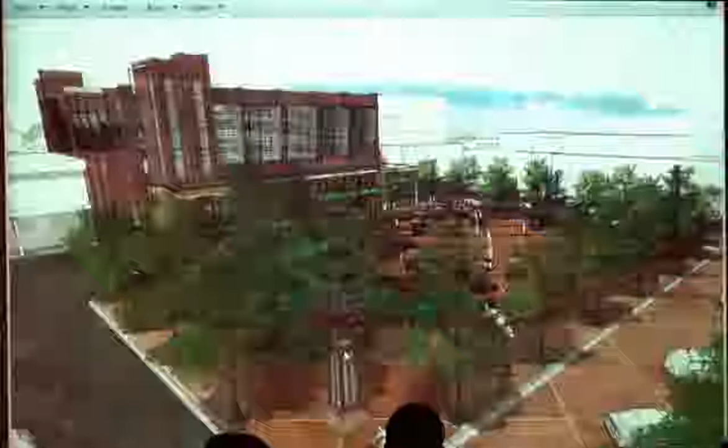This is all in SketchUp, and then there's this one worth writing down - FotoSketcher, with an F, not a PH. So you've probably seen that SketchUp has some ability to do kind of sketchy line styles. If you export that and then give it this watercolor wash, it does twice as good with landscape architecture stuff. If your project is about trees and shrubs and grading, this is what you want to do.

One of the hardest things in 3D graphics is to do soft things like vegetation. Don't try, fake it. We've gotten so much mileage for all of our landscape architecture projects out of doing really kind of soft graphics like this, where there's a mass of green stuff at the end of the day that's a little indistinguishable, for these kind of vignette, bird's eye graphics, to try to describe the sense of the place.

I've sort of gone off here on a tangent. How many of you guys have used SketchUp? Kind of a beginning - most of them we did in a previous class, and then we had kind of a beginning refresher for people, to try to get everybody on the same page on Monday. So, how many of you know the difference between a group and a component? Okay, that's good, that's what I expected.

Let's see if there's anything else here super relevant. Urban designy. Here are some kind of different build-out scenarios in Tennessee. Here's kind of trying to create a downtown core. Really, really simple graphics go a long way.

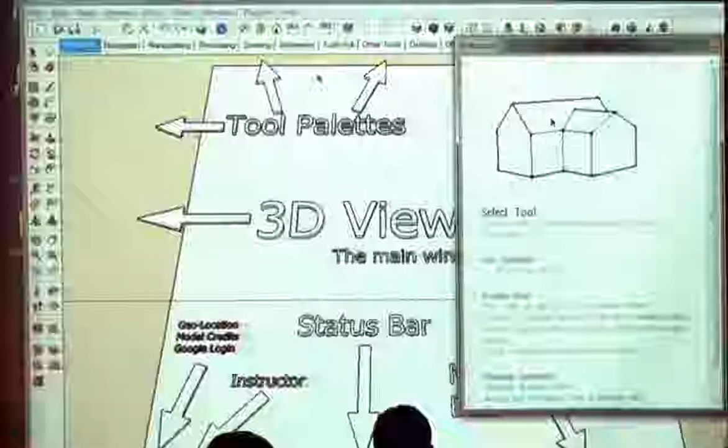This stuff on the left is just irrelevant. The instructor one, the little question mark, is kind of useful - you might find it helpful. It pulls up this tool palette off to the side with even more information and some cute graphics. That's a little on-demand thing and it changes - so here's a select tool, here's the pencil tool, line tool, and it keeps that same kind of stuff, tidbits of information, modifier keys, that kind of stuff. That's a quick access to it.

Those last 3 buttons are totally worthless - ignore them. And you can't see this - oh yeah, and my cute little face there on the right, I forgot about that one. I thought I'd class it up for you guys a little bit today.

We're going to start to go through the menu bars at the top. We'll go through these as needed, but they're pretty well organized. File is pretty basic stuff, printing and saving. Edit - cut, copy, paste, some hiding stuff. Views - generally your graphic style, camera stuff, drawing, editing.

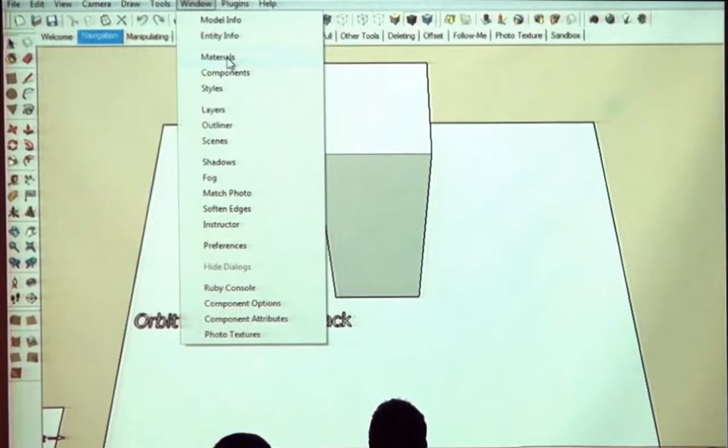And Windows - we'll go through this a lot, but Windows is where - right there, where is it - Instructor lives in here. All of these little tiny tool palettes, like your materials, all of these things live there. So if a window looks sort of like this and you lost it somewhere, underneath Window is where they all live. And then Plugins and Help.

I know it's slightly different on Mac and PC, and I took some notes because they're actually really similar. The biggest difference is when I say Alt, Macs think Command, and Control equals Option. It's really consistent, but I don't have a Mac, so I'm not going to remember that stuff.

Whenever you hold down a modifier key like Control or Alt, your cursor always changes to reflect it. I couldn't even tell you what the modifier keys do, mostly because it's ingrained in my brain, but also because I just watch the cursor.

I just hold down a couple different ones until I get the right cursor. Like if you're trying to select more stuff, you hold down the Shift key and your select cursor gets a little plus minus next to it. So it's really intuitive - don't write it down. Just remember that some of those modifier keys change your cursor icon, and it will tell you exactly what you need to know.

Okay, I've changed this a little bit for today. Navigating is such an important deal. It's so difficult to draw in 3D space on a 2D screen. So I'm forcing everyone to actually navigate through a 3D scene through most of this, just to get comfortable navigating, because it's hands down the most important part - more important than being able to draw well, in fact. Being able to move your view, move your camera to the right location so that you can accomplish what you want is half the game.

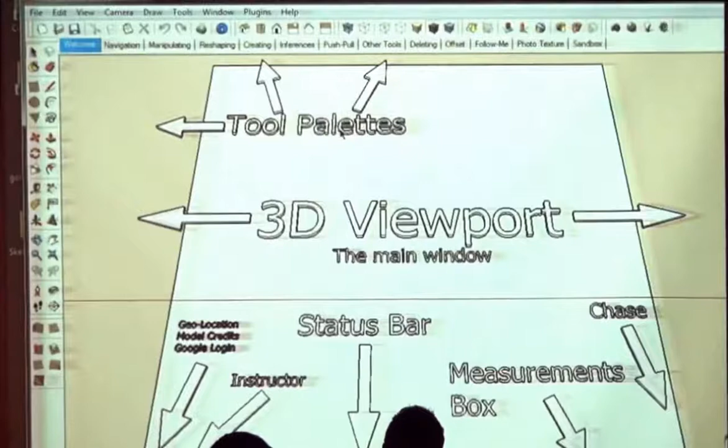So did everyone find that? Large tool set, just so that this is the full palette. And I'll turn off this other stuff so that we don't have to - styles. Okay, and that one's gone too, that sandbox.

Okay, so if you click - and these guys, we haven't talked about that either - these are the scene tabs, and I set these up. We'll talk about them more in depth later, but right now these are chapters for this conversation, okay?

So if you guys all get to navigation, here is the magic. And I'm sure there's lots of non-mice in this room because you're on a laptop, I get it - it's going to be difficult.

First, I'll just talk about the tools, and I'll talk about why the mouse is so important. So those view tools live right here - they're this set of blue stuff. So the orbit tool, which I also don't have that. Okay, the orbit tool is O.

There's a lot of default shortcuts, and I'll try to remind you of them. But if you just press the O key, you should get the orbit tool, or you can click right here next to the hand. It lets you orbit - if you click and drag, it'll let you turn around to the back. The hand tool next to it, pan, H, lets you pan, and lastly the zoom, Z - the little magnifying glass. If you click and drag up and down, it zooms you in and out.

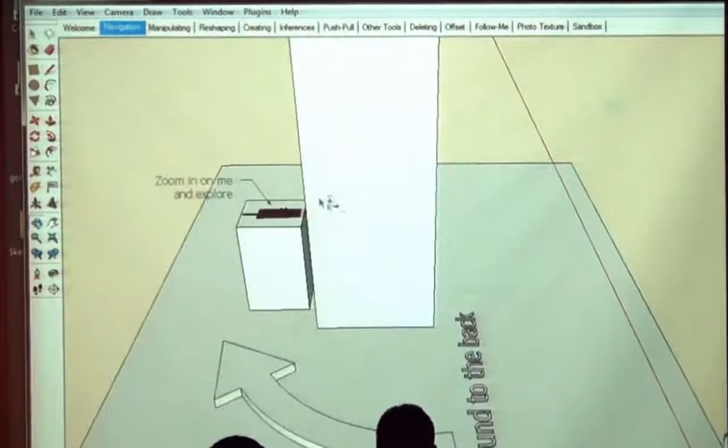For those of you with a mouse, it's all about your middle mouse button. Regardless of what tool you have, your middle mouse button - if you hold down the scroll wheel - turns your cursor into the orbit tool. If you scroll, it zooms you in and out. And if you hold down Shift and the middle mouse button, you get the pan tool. So just with the middle mouse button, you can do all three of those, basically.

So try to get in here and move. Just try to zoom down the street. Try to move through this little urban design-y project.

Am I killing you? Is everyone in the room really comfortable doing this already?

Okay, fair enough. Manipulating. You can just click on the scene tab and we'll get in here. So I have some cars, and these are all groups. We're going to first talk about making things simple and being able to select and move groups.

Select tool, shortcut is the space bar. If you select something like this red car, you can then choose the move tool, which is this guy here, or press M to get it. Just try to move it around a couple spaces.

One of the nice things about groups is if you have a group selected, you can sort of easily rotate them with these little red crosshairs that pop up on its bounding box. Scale tool, stretch it uniformly.

Okay, you guys know this apparently. Moving along, reshaping. As a rule of thumb, something I've learned over time, and I don't know if many other big SketchUp dorks would argue with me, it's generally easier to recreate something than to modify something.

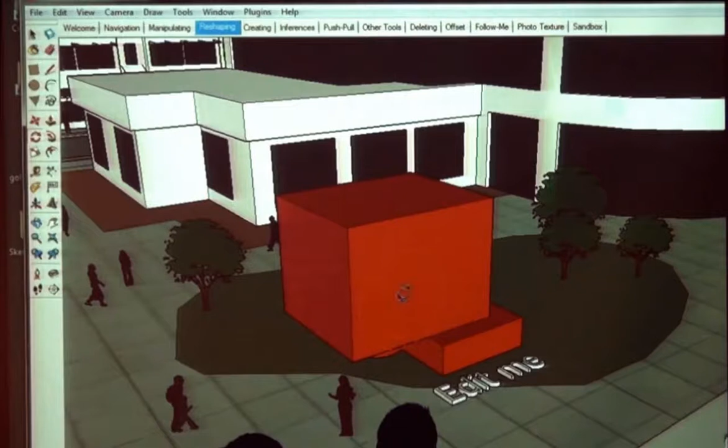So one of the things that's worth noting with this geometry that's loose, not in a group, is if you're trying to modify individual faces, sometimes if you're trying to move something and it won't move — like if I want to move this plane up along blue —

I can't, even if I press up — well, I guess if I force it. But I have to either press the up arrow to lock my axes into the blue one, or do something called auto folding, which is Alt.

If you look at the very bottom of your screen, if you have the Move tool active, there's this Alt toggles auto folding. What SketchUp's trying to do is if I'm trying to move this surface up, it would force a lot of other surfaces to get bent, to get folded, and SketchUp thinks, why would you want to do that? You've already modeled something nice, why are you trying to bend it? That's the trick — you have to either force it into an axis with the arrow keys.

For those of you who don't know, the arrow keys are a way of automatically snapping and locking your motion, your direction, into one of the red, green, or blue axes.

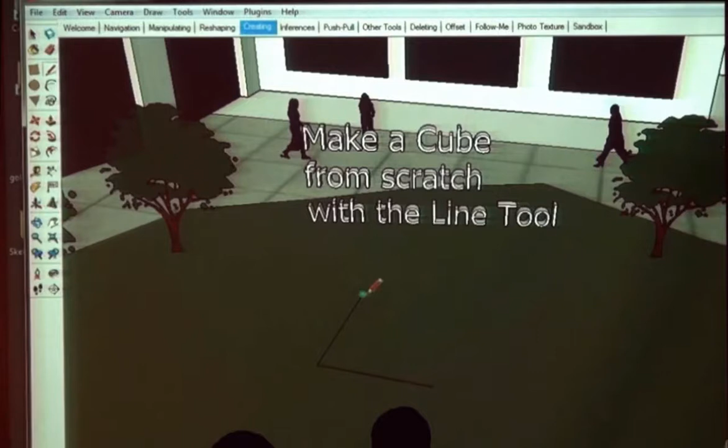So what I'd like you to do is make a cube from scratch. I gave you two edges of it, and I'd like you to go through the process of finishing the bottom part so you have a flat plane, and then making it 3D, all by hand, not using push-pull. Then go up and make sure you're using those dotted inference lines.

There are a couple methods — okay, excellent question. These are subtleties that relate to you as a user. So just using my mouse and the line tool, if I start making this line and it snaps to red, and I start moving it along red, it will automatically snap and put up that little dotted green line, showing that it's inferring that distance.

The other part though, the shift thing, and I use shift — I don't do that, I don't have time to wait for SketchUp to figure out what it's locking to. What I do is, as soon as I get my line to snap to the red axis,

I hold down shift — let me move that up here so you guys can see a bit better in the back. It gets thick. When you hold down shift, that line gets thick, and it constrains it, which is the SketchUp lingo. It constrains it to the red axis, so wherever I move my cursor, it's only going to be making that line along the red axis.

The trick here is that if I move my cursor over the next endpoint that I want to align with, I can force my current red line to be that same length without thinking or waiting for SketchUp to do the little dotted things. So then I click on this endpoint and just close it in.

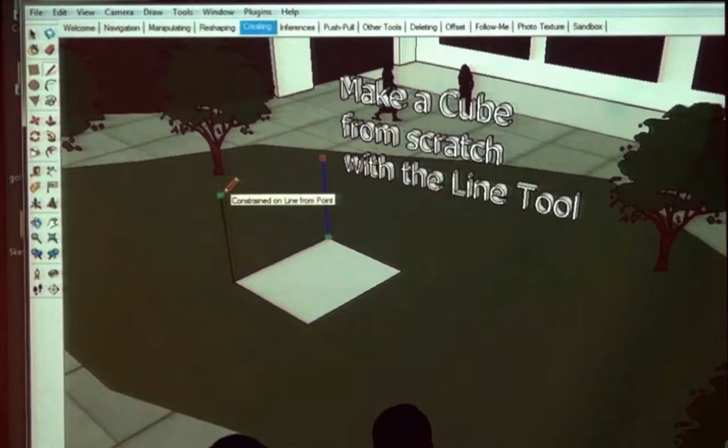So I start making a blue line, hold down shift, and hover over this first vertical leg I made. Then click, let go of shift, and close it in. Click, find blue, hold down shift, hover over the point I want to align with, click, let go of shift.

That's the way I would recommend it, but you don't actually have to use the shift key. SketchUp has gotten a lot better in 8 about guessing without using shift. So anyway, get yourselves a box made.

The inference thing is so huge. Please raise your hand if this is not crystal clear. Okay, moving along.

I'm just not getting it lined up exactly. I should use this shift tool. I think the shift thing really helps.

The biggest blight of SketchUp is when things are close and not quite right, because those subtle shifts are hard for us to see, but they make the model not work at all.

So if you're having issues, like other people are, why don't you guys seriously make 10 cubes there in this time until I get back up here.

There is no way I'm going to get in here, is there? Oh my gosh, I'm off a whole row here. Okay, maybe this isn't going to work.

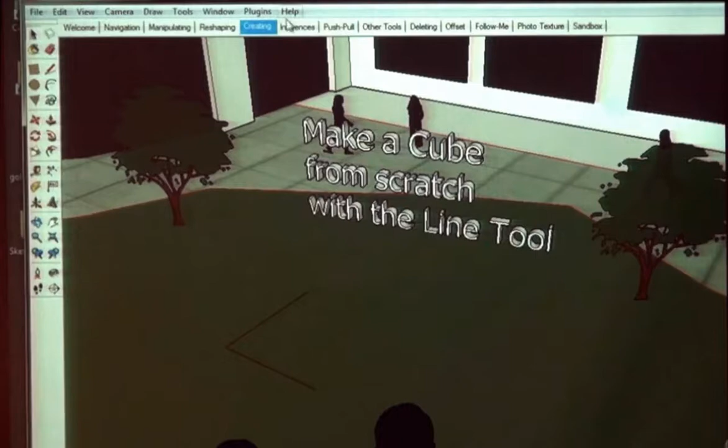So let's move on to inference. Here are some random shapes with holes cut out of them that I'd like you to finish using the inference stuff. So obviously for this cube...

L—we need to make a red line that extends this high and then close it in. For the triangle, here's someone just asked about parallel. There are a couple for the triangle; for the rectangle it's easy because we're on red and green. For the triangle, though, we have to find some magic point here in the middle where these two lines intersect.

And here's how you go about it. Magenta is the color that represents both parallel and perpendicular. They figure they're 90 degrees apart. You should be able to tell which one's which.

If you click on this endpoint, what I like to do is backtrack a little bit and hover over this line segment, and it usually says 'on edge.' At this point, you can try to extend out a line, and it should be magenta. Then hold down Shift and hover over not the endpoint, but the line segment itself. If you hover over the endpoint, it'll try to make a right angle to that endpoint. Rather, you want to hover over this line and say I want this line to intersect this other line. So then I hover over this guy, click, let go of Shift, and click again. Well, it doesn't actually... oh there it is, I did get closed in, it's just the other side showing.

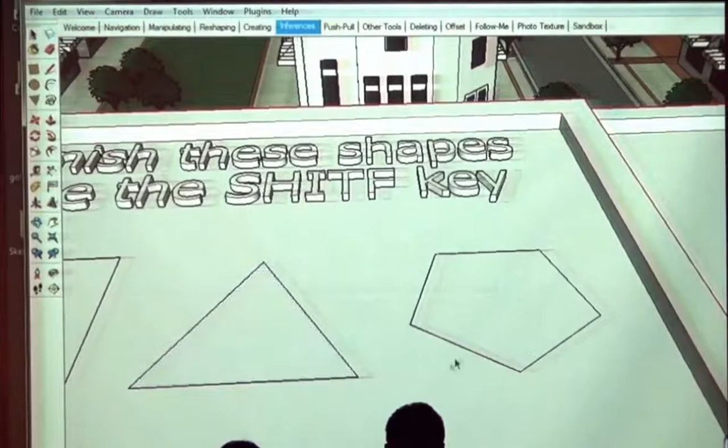Same with this guy: endpoint, backtrack, magenta, hold down Shift, hover over the line segment. And then try these 3D shapes.

Who had the question? Yeah, sorry. I'm gonna click, go back, hold Shift down, and it's just blue. That's just because of your view - you happen to be at a view where the vertical line is right in line with what you want, so orbit over a little bit. Sometimes it just doesn't snap. Oh I see how that's going. There it is, perfect, no that was right. Then click, let go of Shift, and finish. Okay, got it.

So making things groups would help with managing the file size? Not the file size - in fact making groups probably adds a little bit. Making things components saves a little bit, because if you have one tree or one tree type, you can make it a component. What it does is remember all the geometry in one place and then all the locations of that geometry. But groups are not important for file size - groups are important for organization and not going insane, because otherwise it's all separate little lines. So components help a little bit with that.

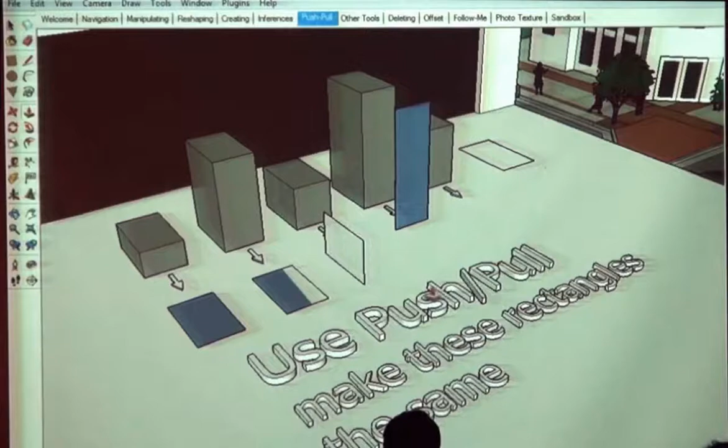What I wanted you to do is practice the same kind of thing using inference, except you don't actually have to hold down Shift for this, which is nice, to make the same shaped cube using those starting points. So this guy, if you click and then move your cursor over any of these endpoints or these lines, it will extrude it to the same height. It's just getting you comfortable using other geometry to influence the height and distance of the stuff you're building right now.

So then from the left to right, front to back, I actually have no idea why I drew that because you can't really do anything. I guess you could use this one. That would work. Going down.

That was supposed to be pretty quick, but it's different, because there aren't any axes, pushing and pulling is a one-dimensional thing. You can only go one direction, perpendicular to that surface.

All right, other tools. Is that all good? Questions? Oh, one of the things, let me go back.

Sorry, I lied. The one other thing I wanted to make you aware of, if you didn't know, is push-pull has modifier keys, the control key. Once again, who cares what control is? Shift, Alt, Control, one of these is going to do something. If I hold down... oops, P.

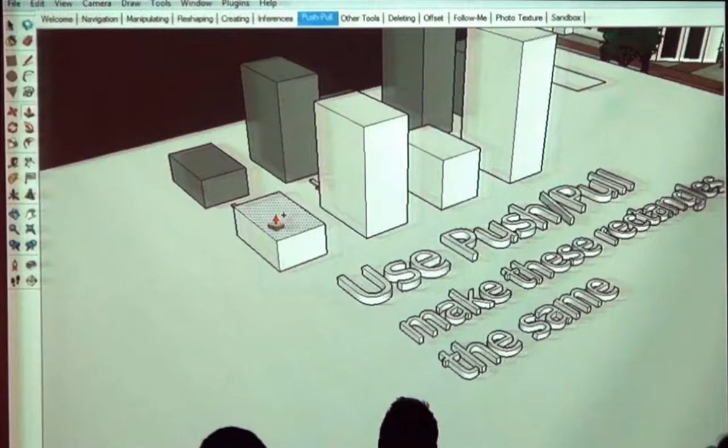I just freaked it out. The control key will toggle a little plus sign next to my cursor, and it will say at the bottom: Control, toggle, create new surface. So what the little plus key with push-pull does is it leaves a division in there for you. It creates a new face rather than just moving that existing face. This is useful for saving you from having to draw new lines generally.

Did that make sense? Oh, navigating, manipulating.

Okay, other tools. Frankly, these are just time savers. The arc is useful, I guess, because it's pretty hard to draw an arc segment by segment. But these make some other shapes. It's just these other guys here.

Rectangle goes corner to corner. Circles are circles, they go center out. Sorry, there's no, for you CAD junkies, there's no 3-point circles or anything.

Polygons, you can choose the sides. So the one thing you can do with this is, as soon as you choose the tool, you can type in a number and hit enter, and it'll change the number of sides of this polygon. So right now it's on 6. I could type in a 3 and hit enter and make a triangle.

Arc tool: endpoint, endpoint, and the amount of deflection. And freehand lets you draw freehand stuff. It's pretty tough to do anything really useful with the freehand tool other than trace contours.

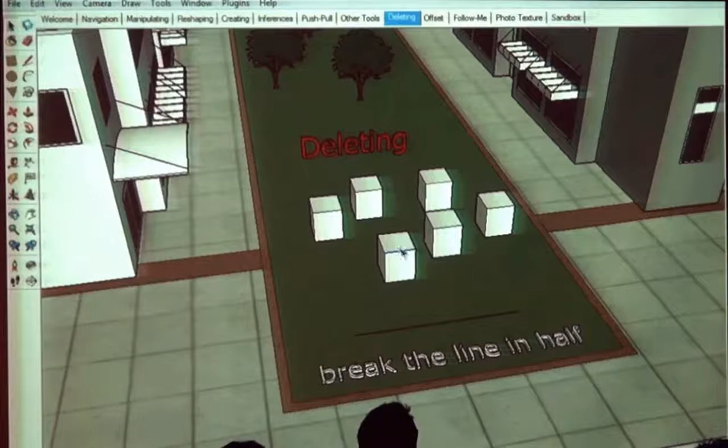So if you single click on something, you get that face, either that face or that edge. If you double click, you'll get that... oops, too close in. Double click, I'll get that face and all of its edges. Or if I double click on an edge, I'll get that edge and the faces it's separating. If I triple click, I can get all of the faces that are connected or touching at all.

Dragging bounding boxes with the select tool left to right needs to fully enclose the object. If I only drag the box over half this cube, I'll only get that one edge. Versus going right to left, it just needs to be touching. So if I do the same thing, I'll get most of that cube, all of these faces and edges, just shy of this stuff on this one edge.

You guys all know this?

Once again, modifier keys: Control puts up a plus. The Shift key puts up a plus-minus, so it toggles whatever you touch. If it's selected, it gets unselected, and vice versa. And it looks like the magic combination is Shift-Control, which gives you the minus, so you can deselect things.

And if you forget those things and are panicked, you have no idea, they're not at the bottom of the status bar here, but I guarantee they're in that instructor window.

Good point, sorry, let's go back to deleting. So one of the things that's frustrating is there's not a way to break a line in half. There's not a break tool. The only way to make a line segment shorter is to connect a line maybe to the middle, so you can snap to the midpoint, cyan, connect a line segment, and then choose the eraser and erase the segments you don't want. There's no break tool - that's just how you have to do it, and that's not necessarily intuitive.

Okay, so offset - F is the offset tool. Is everyone familiar with offset? I heard one no, so there's probably a couple more. Offset works in a similar way as push-pull in that it kind of auto-selects whatever you hover over. So if I choose F and hover over this plane, it'll hatch it. What it does is put a little dot on the nearest edge to your cursor - that's going to be its reference point, indicating we're going to measure an offset distance from that point to your cursor. So if you click, you can start to drag in from that location or out. In this case, we want to go in.

Like with any of SketchUp's tools, do you guys know how to do specific distances for stuff yet? You just type a distance and hit enter midway through any operation, basically. So in this case, we're going to offset this in, let's say 2 feet - 2 apostrophe enter. I think feet are the default unit.

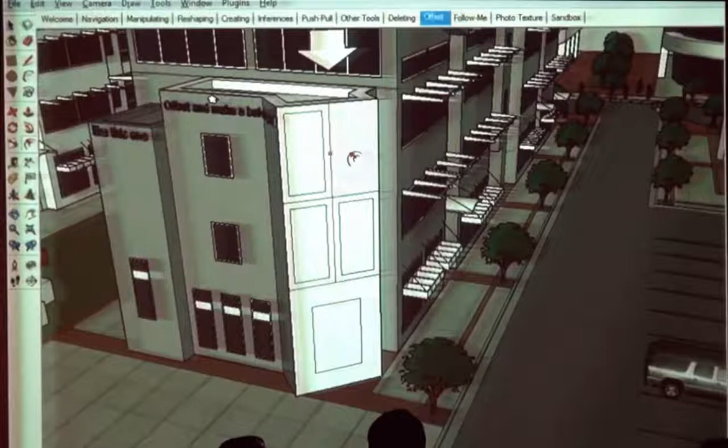One of the nice things with both push-pull and offset is if you double-click on a surface, it will repeat the last amount that you just did, which is a huge time saver. If you're making a whole bunch of building footprints that you're popping up to 15 feet, just as irrelevant context buildings, do one at 15 feet and then double-click on the rest, and they will pop up to that same height. Same thing with offset.

How long is class, by the way? Typically till 9, but... till 9? Yeah, but I'd say, I'm thinking half past 9, 9:30. Oh okay, that's what I thought. Maybe like another half an hour? No, I was expecting till 11. Anyway, we'll just keep going.

Okay, offset and double-clicking all makes sense. Okay, so let's do the next one.

Follow me. So follow me is really sexy - what it does is let you sort of extrude, like use push-pull along a path. And there are two methods. So this is the follow me button - double click, or excuse me, this guy right there, right below push-pull.

So there are 2 ways. You can either select the Follow Me tool, click on what I'd call your profile surface - the one you're going to be pushing and pulling around - and then drag it along a path. So you can do really sexy, complicated things like a planter without a lot of effort.

This is important because it's literally impossible to join these arced parts at these 3D angles. It's a huge thing.

Okay, so the click and drag method works, and you just kind of have to be patient with it. But this is not the recommended method to do it, because you end up fighting at the end, and then all of a sudden you are doing weird things - like, what's this? How did I even get that? And you're never going to fix that.

So here's how you should do it. It's a 2-step thing. You select the path, then choose the Follow Me tool, and then click on your profile. So if you double click on this bottom part, on the base, on the path, and then deselect the surface, then you just have the edges. Then click on the Follow Me tool, and then click on the surface profile. It just does it for you.

When you did the windows, did you do it that way where you double-clicked to get the face and then deselected the face to get all 4 corners, or did you select each one? I did them individually. So what I did is I offset this one and then double-clicked, and it repeated that same amount.

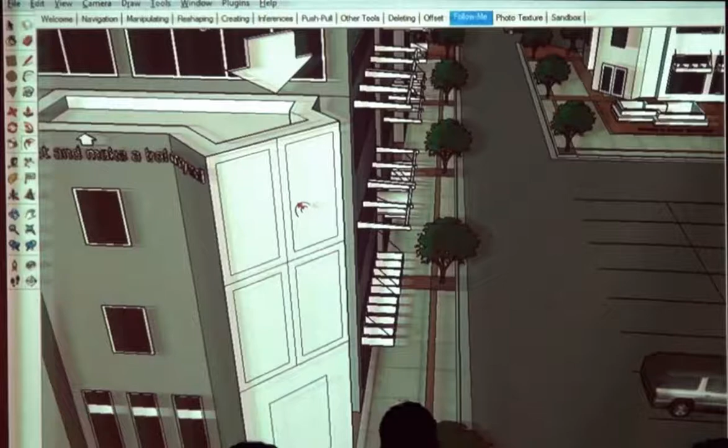Yeah. Okay. Because Follow Me is so sexy, you get it twice.

I have a question. How come sometimes the shapes turn blue and sometimes they turn white? Okay, great question. SketchUp thinks of geometry as being all 2-sided. So a single triangle has a front side and a back side, and they're both visible. This isn't the case in lots of other 3D software. By default the back side is invisible. SketchUp's trying to help you out, knowing that if you export this to something like 3D Studio Max, by default the back faces are invisible. So the default is blue is the back side and white is the front side. If it matters - and it won't since you're living in here generally - you should try to keep the white sides facing out. They should be the visible face. That's what that is.

Okay, so Follow Me again. So the path - you double click to select this whole surface, and then shift click to deselect the surface, so then you just have the outside path. Then choose the Follow Me tool, and then click on the surface of that profile, and it will drag it around for you.

Is there any way to combat that camera cutting off? Yeah, and this didn't happen quite so much at home. This is an effect called frustum clipping, and it happens in geographically large models.

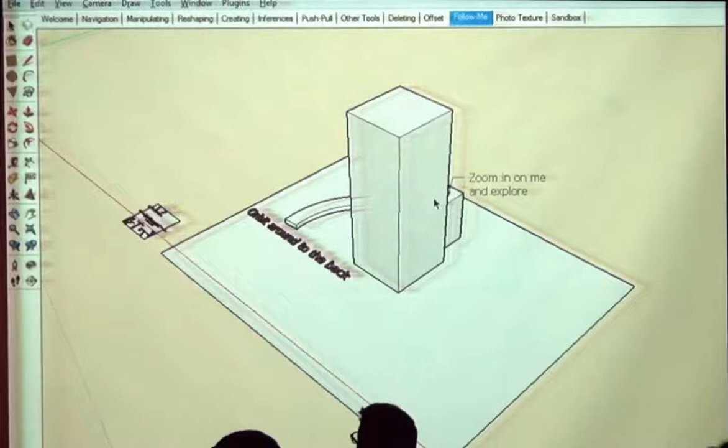Because this little tiny thing has all of this other junk around it, SketchUp kind of needs to be able to think about all of this stuff and keep everything ordered when it renders it front to back. So what it does is it tries to cheat and push the first point you can see farther away from your nose. The only way to solve it is to make your model not so geographically large. It's a proportional relationship to how big your model is and how close you're trying to get into something. It is, in my opinion, one of SketchUp's only real big flaws - there's no way to manually control that.

Sometimes when it's really bad, if you go into a group and hide the rest of the model - where's hide at? Or show, where is it? View. Hide rest of model, and hide similar components. So you're just looking at this one individual group, and then go zoom extents, which is this button here. It'll kind of bring things back and clean up that relationship a little bit. So then when you go back out into the real world, you can sometimes get in a little bit closer, but it's a drawback. It really is.

So when you're doing big landscape projects and you maybe want to have some views of the mountains in the background, don't bring them in from Google Earth, because it will definitely compromise your ability to get on the ground close for the stuff that matters. You're going to have to fake it - put in some kind of wallpaper in the background or something.

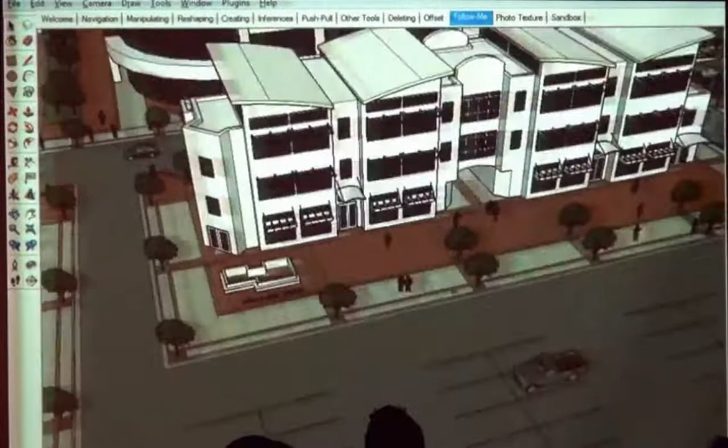I built this for a project, so it's okay, it was a little quick. Groups and components - the difference between groups and components. You've heard both these terms, I assume, or at least heard of them.

A group is just a collection of stuff that's segregated from the rest of the model. A component is identical, except that it shares changes with its twins. So if you make a copy of a group and then go inside one of those groups and edit it, you've only changed that one group. If you do that with a component, you will have changed it and all of the other copies of that component, which is very useful.

But just as many times as it's been useful, I've inadvertently changed other parts of my model that I didn't want to, so you have to be really careful. Let's talk about groups and components just a touch more. Did that all make sense, at least in concept?

Components share changes, components share changes. So let's make - I don't know - let's talk about making a group. So here, let's just go back to our planter.

We'll pull that up. Oh, this effect here, just so you have a word for it, it's called z-fighting. This plane of the bottom of this planter is in the exact same place as this ground plane, and SketchUp just can't decide which one to draw first. So anyway, let's pull that up.

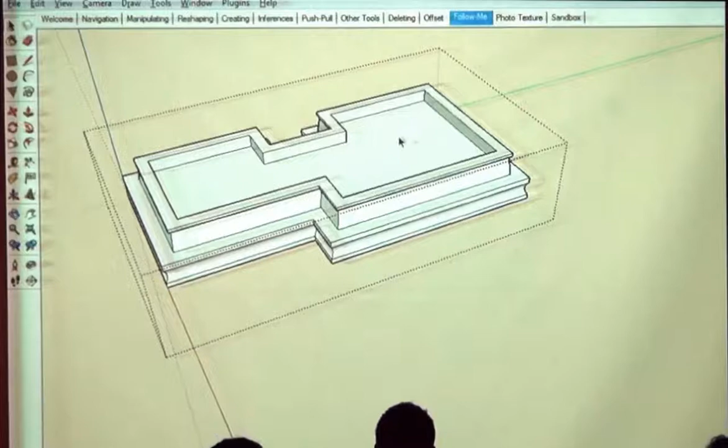To edit groups, let's say you need to put more or less dirt in this planter. You can double click on it, the easiest way by far. Then you get inside, and you can actually manipulate the individual parts of it. Then either hit escape if you're zoomed in really close, or just click outside these dotted bounding lines - the bounding box - and you'll go back out to normal space.

Is that all crystal clear? Groups are easy, and you can have groups within groups within groups, and they keep the hierarchy. It's the way you should model everything - it's the way you should organize your model.

I typically have only one thing ungrouped at a time - the one thing I'm working on at that time. And as soon as I finish it, I group it and then move on to something else. I cannot harp on that enough. Okay, let me undo.

So we get back here to its ungrouped state. Let's pretend now that we know we're going to have a whole bunch of planters, and they're going to be identical to this one. Maybe we don't know exactly what the materials are going to be yet, but we know at least the locations of them.

So we can use this as kind of a placeholder, so we can be thinking about it. On the back end, when we do know what materials this is going to have, we can just do it to one single model, and it'll replicate those changes everywhere. So once again, triple click on it to get it all selected, make sure it's not a group anymore if you undo a couple times, then right click, and right next to it is make component.

This is the defining part that's a little bit different. You get this window to pop up, and we are going to ignore some of this stuff for now. The only thing that's really important is that this bottom box is checked - replace selection with component. You can give it a name, and it's a good idea to name this stuff - it'll help you find things that are lost later on. Planter.

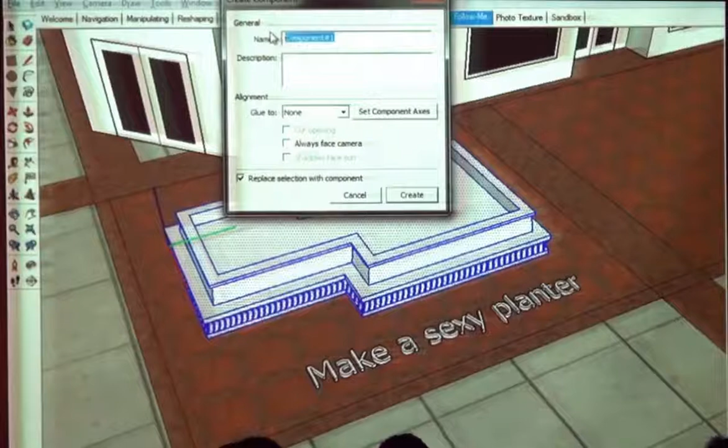And then hit create. Same thing, it's a group, you move it around, it looks and feels and walks like a group. You double click to get into it. But here's where the magic is.

So if I make a copy, does everyone know how to make a copy using the move tool? I heard a no, I heard some yeses and nos. This is an important one. If you do not understand, raise your hands. How about if you do understand, raise your hands. Okay, that's a way better way to ask the question.

Okay, so here's how you do it. You have your group selected. You choose your move tool, M, modifier key. At the bottom you can see it'll say Control equals toggle copy. Who cares what button it is? I'm going to press the modifier keys until I figure out which one it is. You get a little plus next to your move icon. Now you're in not just move mode, you're in copy mode.

And if you use it just like you would, I'm going to slide it over here along the green axis. This is how you make a copy. This is, in fact, the only way you should make copies. You should not use copy and paste. Copying and pasting has its place in SketchUp, but it's not for this, it's not for duplicating.

And if you hold down Shift, it'll slide it along like a red or green axis. It'll lock it in exactly the same way. So you start the copy with Control, then you find your axis, and then hold down Shift.

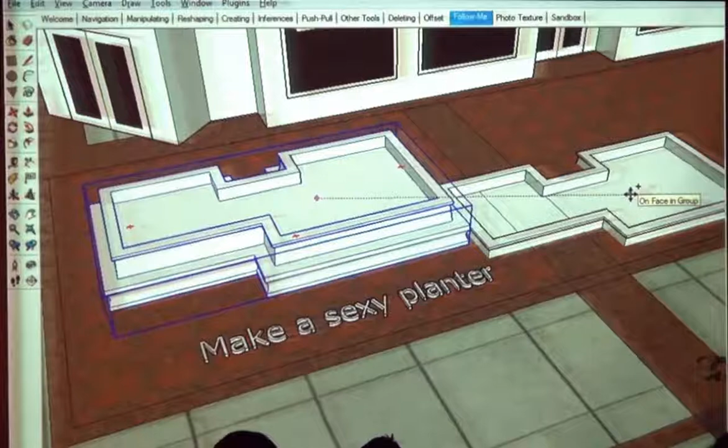Yeah, so let me guess. So you did this, and this is where you got. So you just have to find one of those axes. Or better in this case, if I were to select this, move, copy, and grab one of these, snap to one of these points at the bottom, then I would be dragging around the bottom point, and it would then snap to the ground plane.

So here we have, in fact, let's grab a tree. Here's the copy and paste thing. Copying and pasting is good to move an object from inside a group to outside of a group, or from inside one SketchUp model to another. That's it too. So I'm going to copy this tree, and come out here and paste it. Okay, so I have this tree. You guys could use the planter or whatever, I just grabbed the tree.

So let me talk about this in concept first. Hear my words, watch my motions, and then we'll walk through it, because it's going to take us 3 iterations to get it, just because there's a lot of button pushing at specific times. So I have a tree selected. I grab my move tool, and I make one copy, just like we talked about doing before. Then I do some keystroking. I press the asterisk key, which is Shift 8, and then a number. So asterisk 5, and then hit enter. And what it does is it repeats that same offset, in this case 4 more times. It counts the first one.

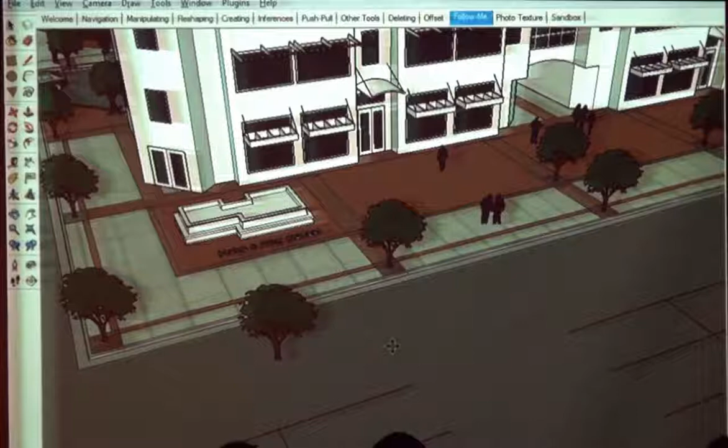Okay, 10 more of you got it. So undo, well, I'll step through this again. Select my tree, choose my move tool, toggle on copy mode, click, move it over, and click again. I've finished copying. Then type in Shift 8 for the asterisk and a number, and then enter.

Don't type 10,000, you'll crash SketchUp. It will, and every time it crashes SketchUp, or brings it to its knees, and you have to wait 10 minutes. Okay, one more time.

Select your first shape, move tool, toggle on copy mode, click, drag, and click so you've finished the copy. Then type in asterisk. You do not need to click in that little measurement bar at the bottom. Numbers you type automatically go there. So asterisk 5, and then press enter.

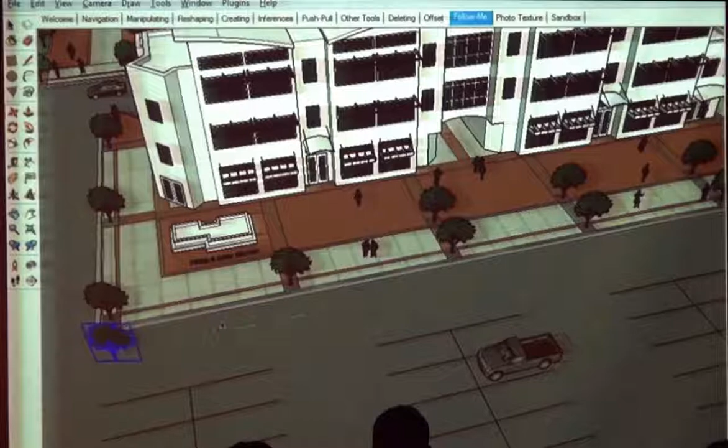So the concept is make a copy, then type in the asterisk and some number. There's a converse of this where you don't know the distance amount but want to evenly space some things. I have no idea what these tree offsets are, for example. If I make a copy to the far location, instead of using the asterisk, I use the divide by, the forward slash, I think it's 4. I will evenly space 4 in that distance, which is equally useful.

But it's the exact same method. Questions?

Now how many of you can make an array? All right, so we needed about 2 more iterations.

How about this? Do you think how that might be useful for our landscape? I know there's a plugin somewhere, but what you can do is make an array in one direction. If you're making a little garden, make an array in one direction and then select those 10 elements and make an array in the other direction to get a grid.

That's useful. You can do the same thing with the rotate tool. You use copy with the rotate tool to fan one over and then multiply. So if you have a column of 10 of them and select all of those, you can fan out those the same way.

You cannot, however, copy along some curvilinear path. If you want to put little garden lights along a little path, you have to do that by hand. There's probably a plugin to do it somewhere.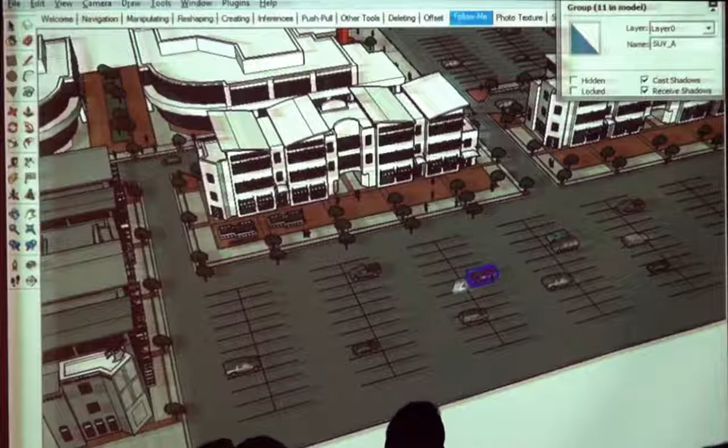The one way that I know to find out easily is if you right-click on something, anything, even on the background, you get what's called the contextual menu. The very top thing is called entity info. If you select something, it'll tell you info about that entity. So this building is a group. This planter I just made is a group. It'll tell you how many there are and its name. These trees, it turns out, are components also. These cars, on the other hand, are actually groups, and it says that.

So that's the quickest thing. And this, once again, if your right click doesn't work because you're crazy, underneath the window menu, same thing, entity info.

A lot of components also denote resources that come from the shared component libraries built into SketchUp or the 3D Warehouse. The word's used a little bit interchangeably for both groups that share changes and a library of parts. If you hear component library, it's the same thing. But generally speaking, things that come from the component library or the 3D Warehouse are components. They are set up that way so that if you make copies of them, they will by default share changes.

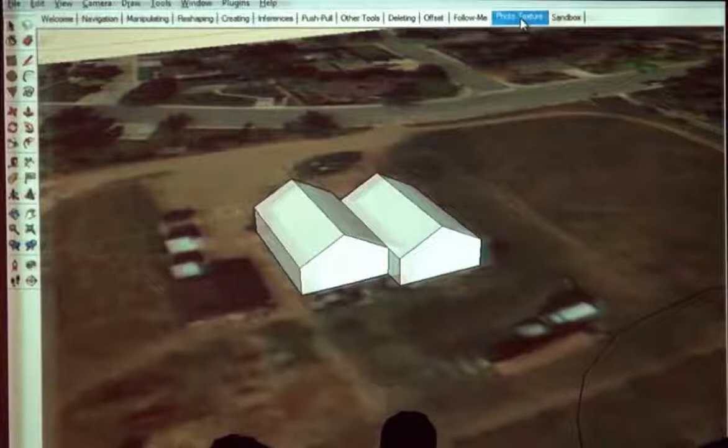So here is, I brought in - I think this is the project site you guys are going to be working on, right? The gardens. And I traced off the air photo pretty crudely, these pair of greenhouses. So the goal here is, also in that zip file I have 3 greenhouse textures or images that are going to become textures. We're going to bring these in, stretch them to this surface so that we can photo map our building.

No, these are ones Jay sent me. They're actually of that greenhouse.

One of the things - this is a good caveat - Jay sent me these right from his camera. They were like 5 megs a pop. Insane for a single image. If you start to do that for a whole bunch of buildings, you will develop an insanely huge file quickly. So I scaled these down.

Remember this number, 1024. It's a little abstract, it's a power of 2. It's a good texture size that you should think of as your maximum width and height. Don't bring in textures bigger than that unless it's going to be one of a kind, like your base map or something. For buildings, people, cars, and trees, 1024 pixels is your absolute maximum, and you should generally make things smaller than that. That is your rule of thumb.

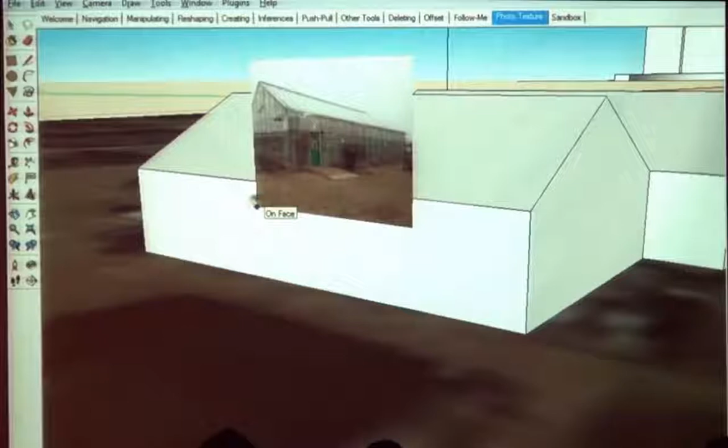So, greenhouse side, Use As Texture, and hit Open. So the paint bucket tool sort of pops up, and it kind of wants to align itself to whatever face or surface you hover over.

We're just going to click - don't try to fill up the space. In fact, it would be better if you kind of intentionally leave it small. So I'm going to click, don't use the endpoints - this sounds silly, but just do it right in the middle of the surface. So I'll click here and maybe click here, and I get this repeating bad photo on here.

File import, image—make sure that you have the file type selected so you can see it, and then use as texture. If you bring it in and it's not repeating, it's because you didn't listen and you chose as image.

Does everyone have this? This next step definitely builds on this one. So now we need to think about it. We already eyeballed the size and shape of these greenhouses pretty bluntly—they're probably close-ish. But what we want to do, we already have this geometry defined. We believe this is the right size for this wall of the building. What we now want to do is stretch this texture out.

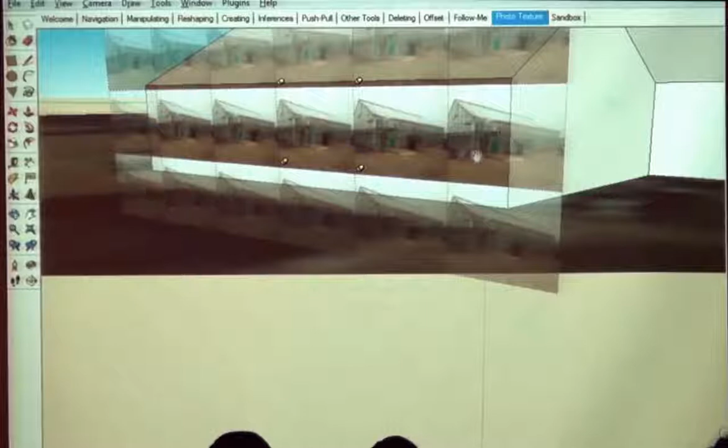What happens is you can see the image kind of continues to repeat off the surface a little bit. You should get some push pins. They might be all yellow, or they might be multicolored. But if you're seeing this, you're in the right place.

Right-click on one of the pins—actually, you don't even need to click on a pin. Right-click on the surface of the image here and uncheck fixed pins so that they're all the same color. So you want unfixed pins.

I'm going to move ahead here, and do this so you understand the process, and then we'll step back through it together. So the concept is that I'm going to pick up these pins. Oh my goodness, this is going to be a little tricky. Okay, change of plans—we can't get in there close enough. Let's see, this is a great opportunity. Undo. Where did everything go?

Hit escape so you get back out. And if you lost the image like I did for some reason, let's re-import that on there. Yes, I do call shenanigans. Okay, so we have it on there. Because this is a geographically large model, you're going to have this problem in the future.

We're going to get in here. We need to get in here a little bit closer than that frustum nightmare lets us. There's one trick to do it temporarily, I guess, to let us get in there and not have that issue—it's to change our camera from perspective to parallel projection. So at any given time underneath camera, one of these three things needs to be selected. If you just choose parallel projection, it'll switch you to it.

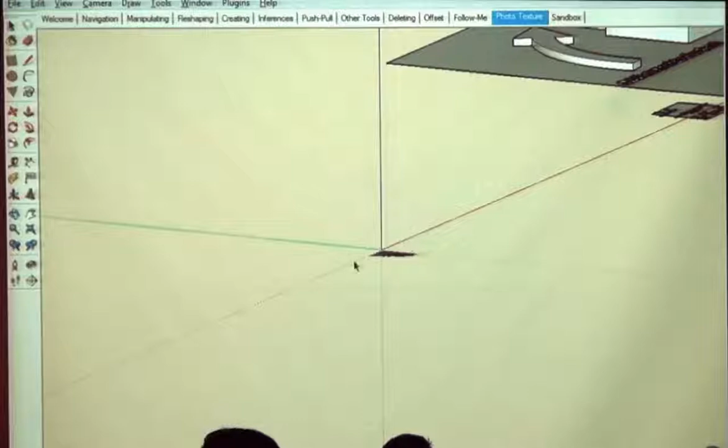At this point, who knows what's going on—I can see part of my model is getting clipped off. We need to hit the zoom extents button underneath the hand. Zoom extents, okay, and then zoom—you have to zoom back in here by hand, I think. But now we can get in here super tight. That's one of the nice things about parallel projection: it doesn't have that clipping issue, but you're also forced to not be in perspective, which looks a little bit weird for some views.

Parallel projection—did everyone get that? So: camera, parallel projection, and then zoom extents. You need to probably do zoom extents after that. You should just re-import it—I lost mine, I think, when I canceled out of that operation.

Okay, so... not yet. I like the blunt. I like the bluntness.

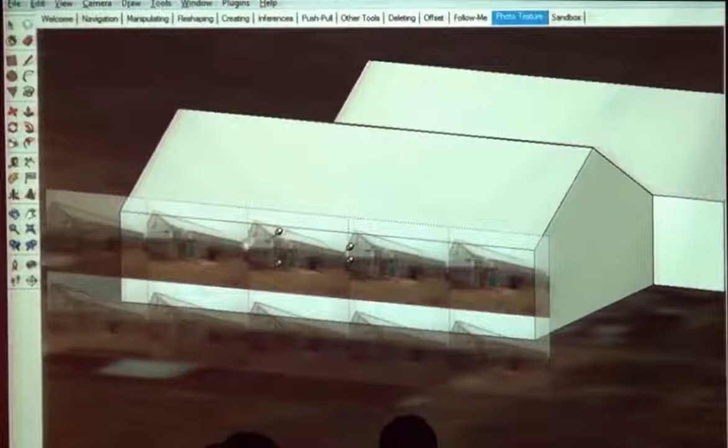After I've placed them, and they need to be unfixed—they need to be the same color, all one color, quit doing that—then I can actually stretch these out to the corners of my building and hit enter. And instant texture. Okay, so let me undo.

Right-click, texture, position. So two steps: one, you want to position your pins on the image, and you zoom in there, get in there good and tight. To do that, you click, you tap on a pin, and it gets in your hand, then you zoom in and tap again so you don't click and drag—you click, move, and click again.

To position them on the image. After you've done all four, then you click and drag to stretch those pins to the corners of your building. So the yellow ones are movable? The colored ones are too, but they do different things.

My pins are staying at the ends of the image every time, not getting to the edge of the building, even though they're not checked as fixed. You have to really zoom in. You click to pick it up, and then click again to place it, and after you've done all four, you click and drag to stretch it. My right click doesn't work, is there any way I could do it without that? I think as a Mac user, you can control click still.

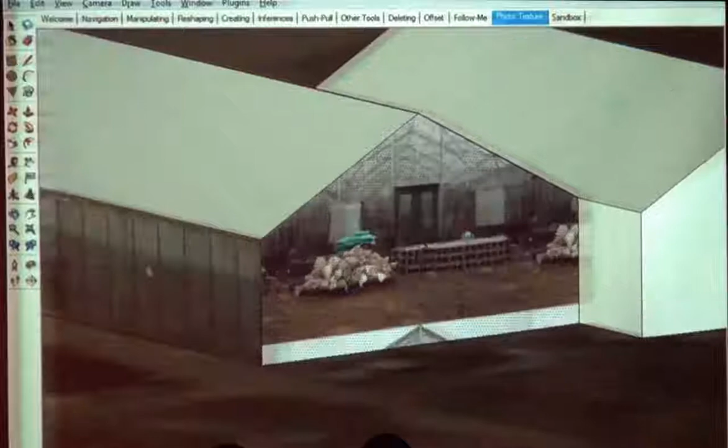Let's do another side. If we do the front - file, import, greenhouse front as a texture, stretch it out generally. Texture position - this one's a little trickier, you're gonna have to kind of guess where some of the corners are.

Is it possible to cut off the roof and make it a separate piece? Yes, you can, it's just textures. So what I'm doing here is I chose these 4 points, but you could have chosen the roof as one of those 4 points instead - maybe I could do this, so those could be my 4 points.

So what I could do, since I've placed this on there, and for whatever reason you want the roof to be different, is just divide this surface using the line tool, and then stretch texture position just this top part. Maybe it needs a door on it too, so you can do that. Because I've divided that surface, you can work with those two parts and retexture that other surface differently.

Can you use textures for curved surfaces? Yes, we will talk about that. The short answer is textures for curved surfaces are difficult and cumbersome, and there are semi-advanced tools in other 3D modeling programs to handle this specifically. SketchUp does its best.

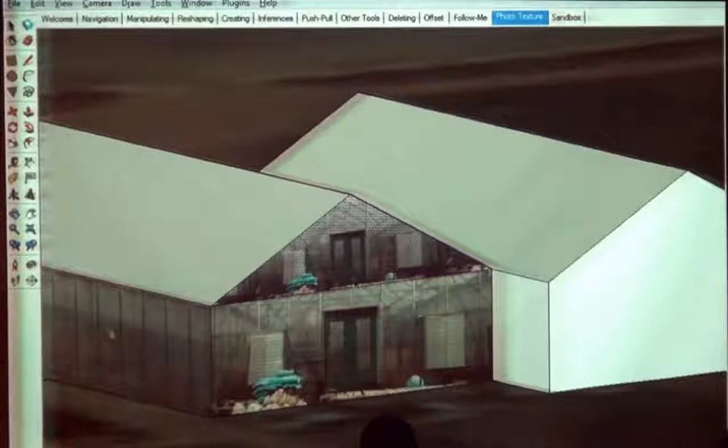Okay, so is this making sense? You just keep doing this. These are individual textures, and you're stretching each one to each individual face.

So basically when you go out and take pictures, like if I wanted to go take pictures in this greenhouse, they don't have to be straight on, they can be skewed. I do both. The ones on the corners of buildings work better for you to understand how it comes together, where that chimney is in relation to the other stuff and so forth. But the ones that are straight on look better as textures.

A little perspective never hurts much. And once again, even this side that was at a pretty steep angle really isn't that bad. I think that was on, which one was on the near side? Even the pixels on the far side really aren't that bad.

So some perspective just doesn't hurt. One nice thing is if you have a perspective of a corner of a building, you can texture one side, then suck up that texture and put it on the other side - it'll automatically have the shared edge positioned correctly. It's a little bit of a shortcut if you're really frantic. I don't know, it's only going to save you like 30 seconds, but...

Is there a way to copy and paste the texture?

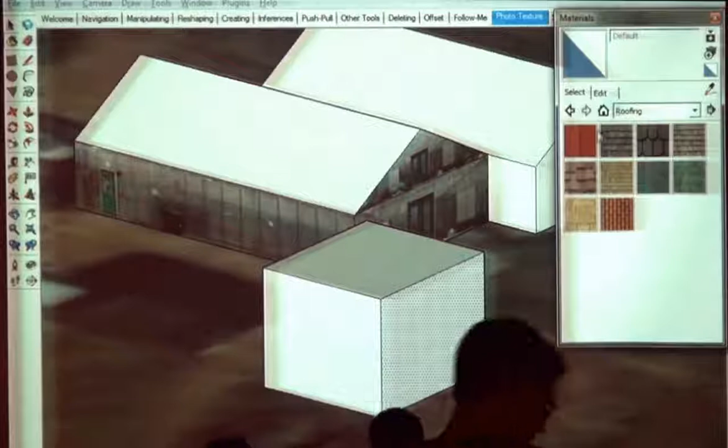So there's a library of stuff - colors, which get used a lot by me. Some of these other ones, roofing, some of the roofing ones aren't that bad, but there's a lot of just throwaway materials that look cheap and used and not sexy in here.

So if we go back to colors, if I want to do this red here, you click on here and your active material pops up in this location, indicating where your active one is. If you want to untexture something, you can't really have no material - every surface has a material. If you want to apply the default material, the whitish purple stuff, there's a button for that right here. So that is essentially untexturing, I guess.

So red, okay, now this is closed. I don't know where this red is, I've lost it. I really want this red to go on this side, and I've chosen a different material. The way to suck that material up, just like in Photoshop, is to use the eyedropper. There is no eyedropper tool button - and it's really disappointing, it's actually not even down here.

There is a modifier key. On the PC it's the Alt key, which turns it into an eyedropper. There's an eyedropper in the materials - on the Mac? No - oh there it is, good call, and it's Command. Command, there you go, so that's how. So the eyedropper will make your active material whatever you just clicked on, and then you can place your red wherever you'd like.

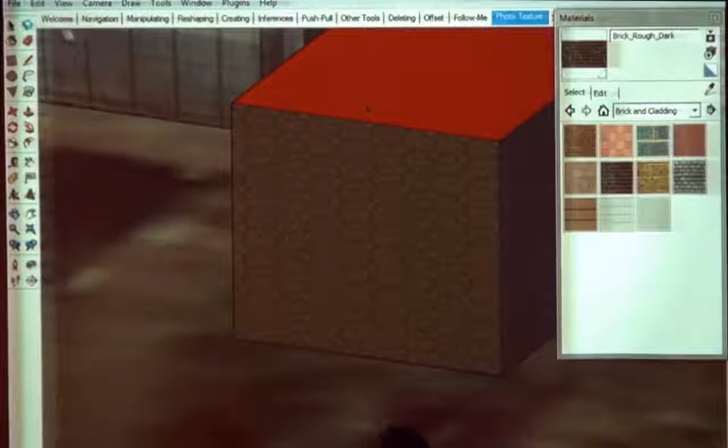There are a couple methods. I have this brick still active. If I choose the Edit tab, I can change its size right here. So if I want that whole image to get stretched, let's say 3 times, I can just type in 9 feet, and it gets bigger. That's weird, that works. I actually never do that, ever.

If I want to stretch a texture, what's nice is that did it for everything. But usually I'm a little more visual, and this image has 5.5 bricks across the top, and I don't want to do that math. Math sucks.

If I right click, I can do the same thing. Right click, texture, position. But instead of using the unfixed ones, if I right click and make them fixed, the fixed ones do some different stuff. The red one, if I click and drag it around, it just basically pans that image, it offsets it. The green one scales it uniformly, which in this case is what I would be trying to do. It also rotates it.

Then the blue one will stretch it vertically and then does some shearing. And the yellow one, if you ever find a real useful use for it, give me a call, tell me that that's going to be useful to you. It's just insane, but it helps round out the process there.

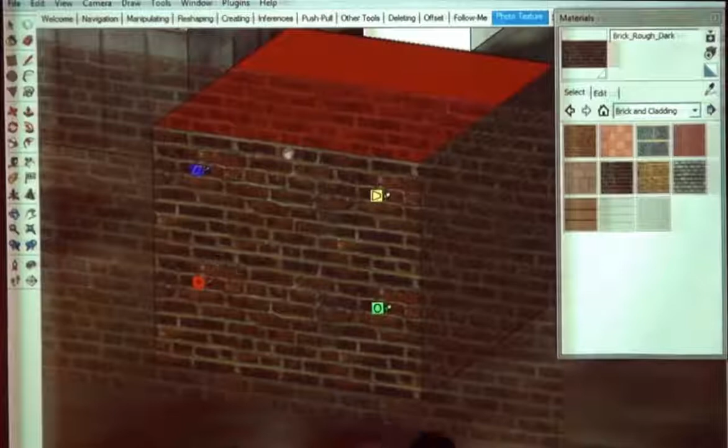So that's how I stretch out this texture. Now, if I hit enter to keep those changes, I only really made those changes to this one surface for this particular material. If I want to replicate those changes, I have to suck this texture back up, because believe it or not, these are 2 different textures. It's not just the image, it's also the scaling relationship of it. So if I suck this up and then paint it onto this side, I get those larger bricks. Did that all make sense?

Should I start asking these negatively? Did that not make sense?

Okay, so it's the same, it's the exact same process. If I brought in, I am sure I can find a material, so I'll just do it to show you. Import. Oh goodness, computer, data, 3D resources, textures, brick. How about you? As a texture, same thing. I just click, get it on there, and then make sure I resize it.

Texture position, and then maybe I'll drag it to the corner, and maybe it needs to be that big, and then enter.

And there it is. If I want to find it, there's select edit, and then really there's a home button. Hopefully you Mac guys can find it. The home button shows you all of the materials that are used currently in your model. This one's not selected, let me eyedropper it. So there it is, brick. In fact, it's the very first one. They are in alphabetical order, I believe.

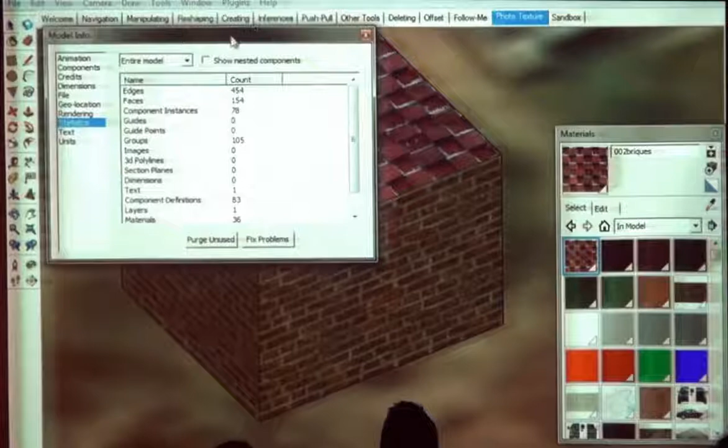One of the things that happens a lot is your model starts to get too big, and maybe you need to clean out some materials that you're not using. There are two methods to doing it, and this is worth noting. If you go to Window, Model Info, the very top one, there's all kinds of cool stuff in here, and hopefully we'll have time to cover some of it.

If you choose Statistics over here on the left, there's something called Purge Unused. It's just like for your AutoCAD junkies, the same thing as Purge. If it's not being used, it's going to delete unused layers, unused materials, unused components. You can have a definition of a component, just like a definition of a material, but not actually have it in your model anywhere, and it would delete it too. So if I purge unused, a couple of these shifted, and next time you save it, your file will get a little smaller, hopefully.

The other thing is, if I need to get rid of stuff and I'm using all these materials, say I know I'm using these two types of brick, and maybe I just won't have brick in this model, I'll just let those faces be red or whatever. You can right-click on one of these and choose delete, and it'll give you a box that says, hey, this is being used, we're going to replace it with the default material, is that right? So it goes white and it goes away. Same thing here, delete this, and then it goes away.

So one of the things I did for those white buildings you saw in those Farragut images is when I imported a building, the first thing I did is just delete all of its textures, so I just had them default, and then went through and made the windows black.

Okay, questions? That was a whole lot of talking. Does it take more memory to display textures versus just plain color, in terms of rendering speed or file size? The answer is yes either way. It takes less - plain textures or plain colors are way less.

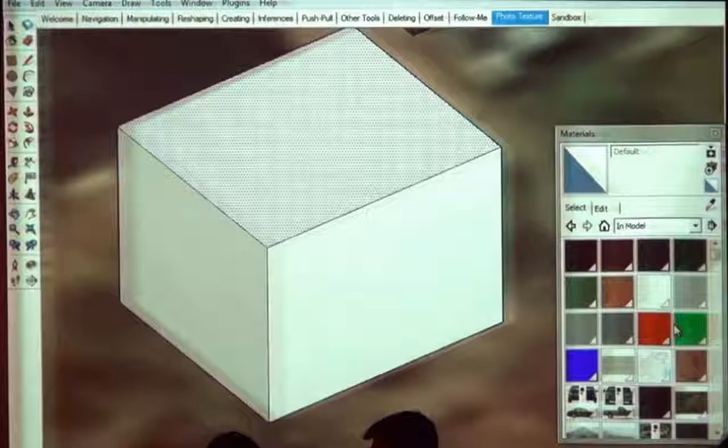There's always a tenuous balance between doing 3D modeling and texturing for 3D artists - how much do you model and how much do you texture. Good textures go a really long way, and you can have really simple geometry that looks good because it has a nice texture on it, versus modeling windows with recesses and having really simple textures on them. There's a balance, and it's part of the whole style, personal touches thing.

Anyway, okay, so textures, did that all make sense? That was a ton of verbiage. So it looks like you're using the same thing for cars too.

Yeah, so cars - this gets into somewhat advanced concepts, but it's quicker for SketchUp to render one image, one JPEG, with those 4 different sides than it would be for 4 smaller JPEGs applied in the same way.

So if this was one 1024 by 1024 image instead of 4 512 by 512 images - that's uber 3D programming insanity, but okay. This is pretty advanced, you don't need to try to get to that level. Doing it this way should be enough, as long as you scale down those textures.

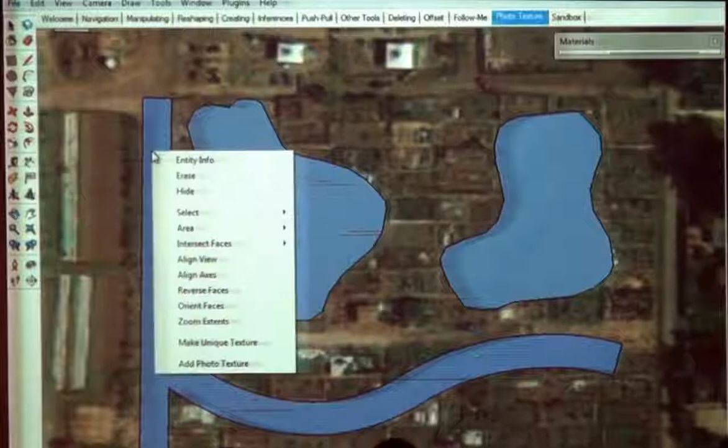If you guys - we talked about the blue-white thing just to feed your anal retentiveness - to change that, to reverse those faces, if you right-click, you can choose reverse face. So I'm going to be anal retentive here. So in my materials, I'm going to choose green.

This green can be our planting beds, and this gray can be our sidewalks or our paths. And maybe even our paths are really, really sexy, and we've got some banding in here, maybe a little highlight here, some more banding. That's not evenly spaced - that really looks nice.

And we'll put in - look at this, I even have a concrete texture. Well, here, let's actually do some concrete there. Ooh, not there, there. And then this brick here can be our bands and that.

Okay, so you have to do a cost estimate - and oh my God, what are you doing? So you have to do a cost estimate, and you need to figure out the amount of mulch and liner for your planting beds, and you need to figure out how much concrete and brick pavers you need.

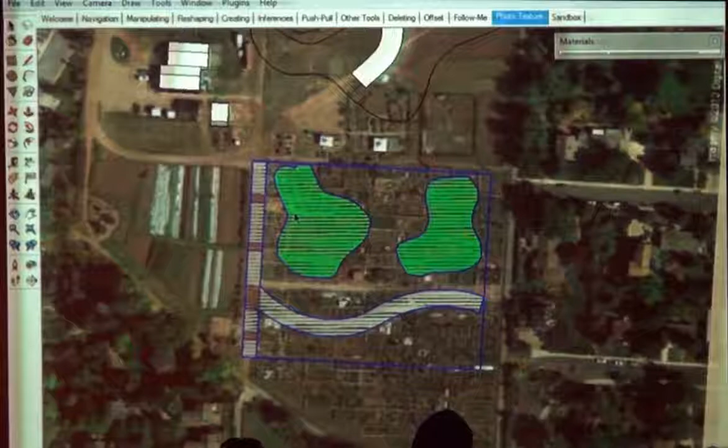So I'm going to put this stuff all inside a group, to make sure it's separate from the rest of my model, because I'm almost positive I'm using at least some of these materials somewhere else. So if I double click and go into this group, I can right click on something and choose select all with the same material. Now I've selected, pretty magically, all of my planting beds in this case. Right click, entity info, shabam - there is my square footage.

Drop those guys into an Excel table, and you can do really quick area takeoffs. This gets used all the time. I literally did this for an underpass project in Louisville. We've done it for FAR calculations and land use stuff.

Parking ratios, it gets used a ton. It's super helpful, being able to think about these materials as also a way to come back. Sometimes I have two sets of stuff, like an actual building model, and inside that there'll be a group of floor plates that are color-coded by use: commercial, office, residential. Then it's easy for me to come back in later and quickly get those area takeoffs.

So the trick is to make sure, because I know I'm using this concrete over on that other model, if I put it inside one group, it'll be isolated for when I do the select by material.

If I right click, these are easy. I could double click on it and get my area. But it's a little harder to select all of this concrete here. So if I right click on one of the chunks, I can go select by material, or select all with same material, and it selected all those chunks.

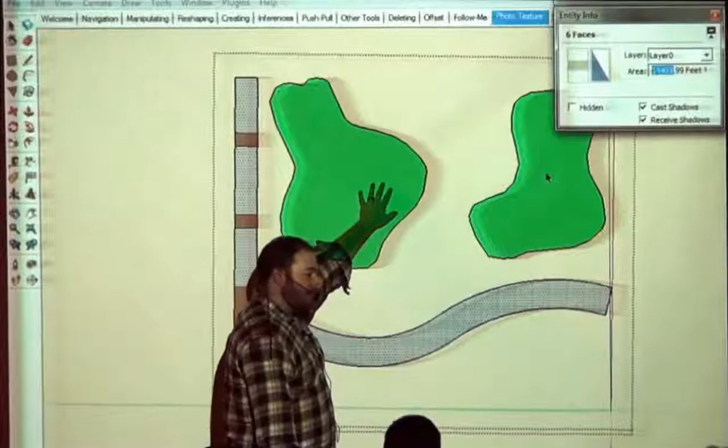Do not use layers. So don't put... I'm sure that if you had this on one layer, planting bed 1 layer, planting bed 2 layer, it would still select both of these in that scheme if they were both in the same grouping hierarchy. But you would never do that because that's wrong.

Here's why. Everything in SketchUp has two chunks: surfaces and edges. Small nightmares take place when a surface is in one layer and an edge is in another. It's really easy to do when you're making individual parts of your model go onto different layers. Things get lost, you start drawing, and unintended consequences happen.

So under no circumstances should you ever put lines or surfaces onto different layers. If anyone tells you differently, punch them in the face. I'm not kidding. Before this, we were under the impression that layers were a good idea. Yeah, whoever said that, you should have punched.

So the other half of this is that if you put entire groups or entire collections of groups on layers, that's okay, because it gives you a quick toggle to turn on and off all of your trees or all of your buildings. But you only move entire groups—just the container part, not the stuff inside—to different layers, so that it's just a toggle. This is useful because it gets cumbersome if you have different alternatives or phasing for a project, keeping track of both different views in your tabs.

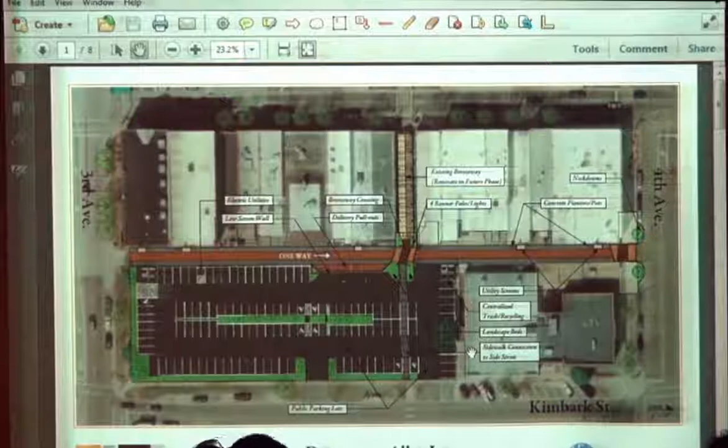When I need to give something additional emphasis, in this universe you just have to give it an outline and give that outline a color. That's the unfortunate reality. It is something SketchUp's aware of - they're working on that issue.

Can you talk about... well, I don't want to. If you have more to say about this, please do. But can you talk about format - just talk about exporting to other programs and formats? Okay, what time is it? Okay, so we have... let me attack some of that stuff, and then we'll talk about the sandbox tools.

Underneath options, you can change settings - you can either have it be the exact number of pixels back here on your screen, or you can uncheck that and type in something. There is a max - on even my beefy monster computer at home, I've never gotten even basic graphics to go much bigger than 5,000 pixels on a side. So 3 to 4 thousand is usually the high-end max, which is big enough for plotting. I plot stuff all the time using those scale images.

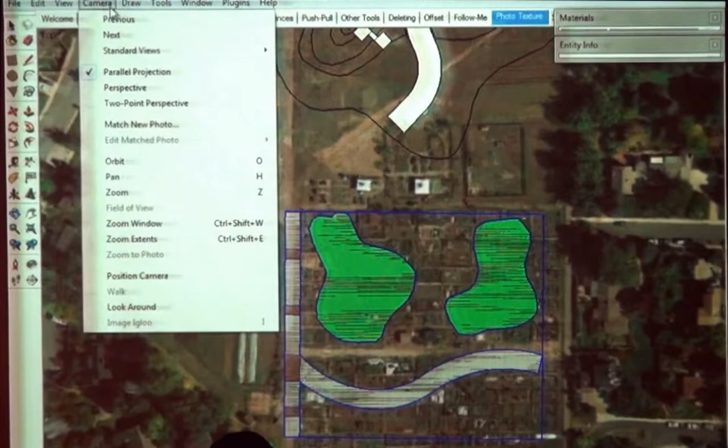Camera, standard views, top. Okay, so export. There's two different exports: there's 3D model stuff, which is great for exporting to AutoCAD, and then there's export 2D, which is a little more page-space like. Export, so PDF or EPS. PDF, options, full scale. I don't know, that's insane.

I believe I've tried this before, and it doesn't work good. What it does is ends up rasterizing a lot of the stuff, so I end up getting strips of image rather than vector lines. It might have to do with the image being there, but it has a lot to do with what's in your view when you export it. So transparency: if you use hidden line, then your lines come in actually editable with endpoints and control points that you can manipulate in Illustrator. Shadows and things like that come in as filled shapes that you can then manipulate.

So what's the file type then that you save? PDF, either EPS or PDF, will save. But you have to have it on a hidden line style? Yeah, in my experience, I don't know that I've ever tried to not do it on a hidden line style, because I always just get image strips.

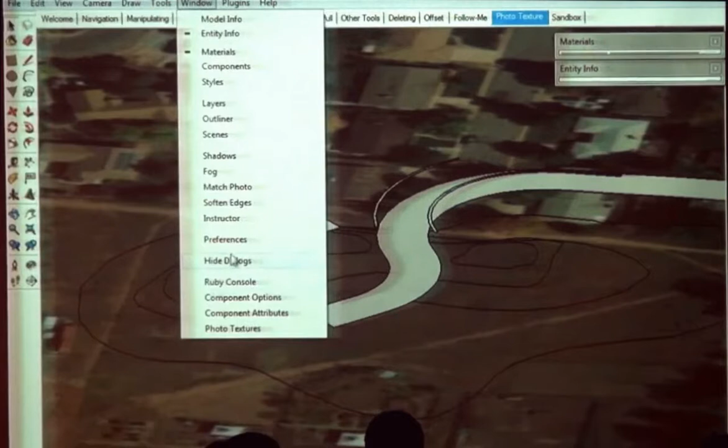But so anyway, we have to turn this on, not all of you probably have it turned on. If you go to Preferences, Window Preferences—on the Mac, you're under SketchUp Preferences—go to Extensions, and make sure the sandbox tools is checked. First goal, make sure it's checked. It might be, okay. Then underneath View Toolbars, Sandbox Tools, or it just says Sandbox, I guess. So here, it's this little guy here.

So we have this set of contours, and we want to now create a terrain. This is really useful for more than just terrains, so keep that in mind—if you want to make more irregular shapes and you just have outlines of some of the key locations, the same thing applies. So this is a group, we have to double click into the group.

So inside of, I turned on the sandbox, but that box didn't pop up. What does it look like? Oh, is it just in here somewhere? No, nothing came up. Oh, you have to go to View, Tool Palette, and Sandbox. Yeah, you have to turn on that tool palette—View toolbars, and it should be towards the bottom somewhere.

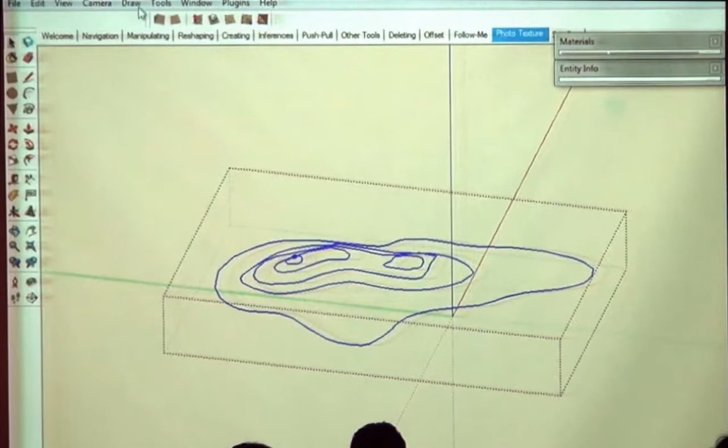You select these contours, and then there are two buttons here: one's called From Contours, the other one's From Scratch. You press the From Contours button, and it stitches it together.

So all you need to do, for whoever just asked that, is select all of your contours. You have to go inside the group, you can't do it from a group. If I just select this whole group and click it, it says, hey, you don't have anything selected. So you go in there, select all this stuff, and then press the From Contours button, and it stitches it together.

So what this made is another group. If we go into it, it's a 3D surface, it's a tin. What it literally does is say, hey, I'm a vertice, where's my next closest vertice, let's connect it. So it just basically zigzags together. It's really stupid in the tool.

If you just triple click on it, you can show these, they're like hidden lines. And you can see that in some places it actually filled in on the outside. So that's the contour line there in blue, and it stitched on the outside. There's sometimes some cleanup involved with these if that was wrong.

Wait, so I made it into a group, and then I tried to use the sandbox tool, and I know that you can just set it. You go into the group and do it. You don't need to make those contours another group.

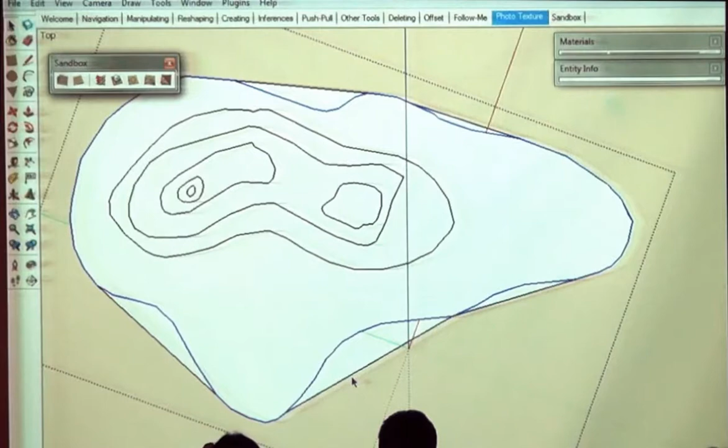Okay, let me back up for you. So I have these contours here. They are a group already, and I could either ungroup them, or just go inside that group and select all of them individually, and then press the From Contours button.

Okay, so I have this group. Let's explode this. Exploding is ungrouping, if you right-click on it.

And then we should have our contours, which we could either delete. Sometimes they're actually nice, depending on the style. I'm going to leave them.

Question? Yeah. You don't have this toolbar?

Yeah, well, the step before that, you just have to go into the group. No, like, I'm talking about...

One of the purposes, I think, is just, so underneath Window, Preferences, Extensions, make sure that Sandbox Tools is checked.

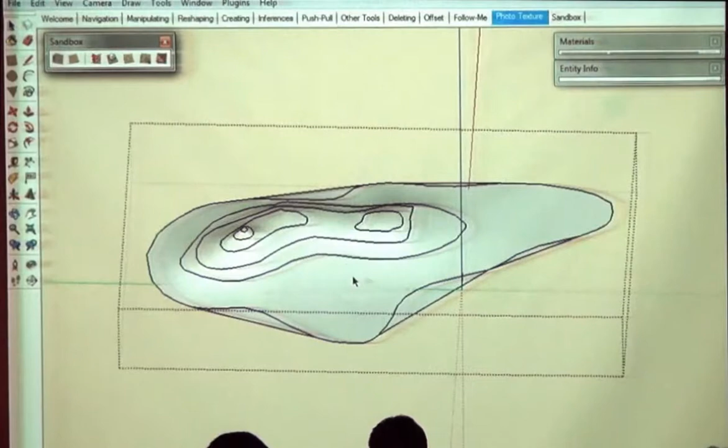So it's not letting me select explode. Are you back out here in this whole model space? Yeah, so if you select it, right-click, explode's not an option there. It's not going to do a lot right now, because there's that.

So the hierarchy is one big group, and inside of it there are the loose contours individually, and then there's another group that is the terrain, the stitched together terrain tin.

Explode. Okay, so then I have these loose contours, and if I click on the surface again and choose explode, then they kind of all knit together. And this isn't, you know, I kind of like the look.

I think it helps read the landforms a little bit better, leaving those contour lines cut into it. But if you dislike them, we can do something called softening to remove them, which we're going to talk about right now. So did everyone get back to this point?

So if you just explode that puppy twice, you should have the landform with the thin-edged contour lines cut into it.

So now this sounds insane, we're going to triple click on this thing and make it a group. Okay, there's a wonderful menu or palette called Soften Edges underneath Window.

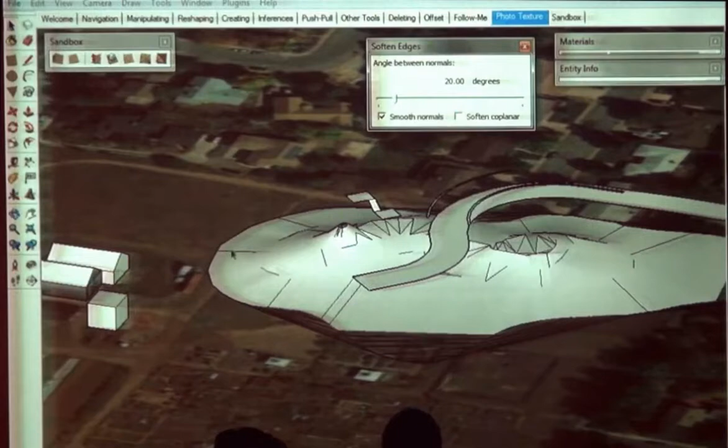So, like you saw when I first triple clicked on this thing, there's all these little dotted lines that represent all of the individual triangles that make up this surface. This concept of softening is one where we remove those edges from kind of the rendering process, because we want this shape, this landform, to look softer. It doesn't have these crisp edges that look jagged.

So what we can do with this thing is just drag this bar, and it will remove as few or as many lines based on the angle in between them as we want. And then there's a great checkbox here for Soften Coplanar, which if you move that up to 180 and click Soften Coplanar, it should be one smooth blob of terrain.

Also, conversely, if we're going for some kind of stylized look, we do want some of those lines, so we kind of find some middle ground for that softening. But we don't want quite all of these—there's too many right here.

We can use the erase tool to do them by hand. If you look at the bottom, Control equals Soften Smooth. If you hold down the Control key, your cursor doesn't change at all, but if you click and drag over these, it's not actually deleting them. If I were to delete them, I'd get a hole in my model. Instead it's individually softening out the lines you click on—that's how you clean those things up by hand.

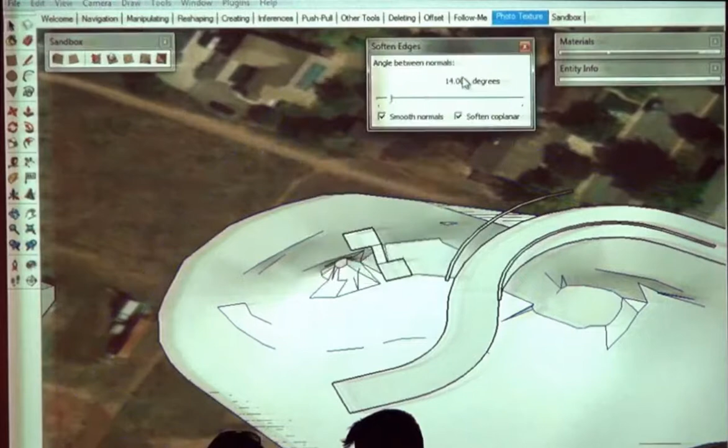So these lines do a couple things. Let me make it into a complete blob here. Smooth, soften, all the way up. Okay, those lines do a couple things—in addition to being a graphical element, they also help define different surfaces. So if I was texturing that walk, it was one flat plane, but I said this chunk's gonna be concrete, this band's gonna be pavers, and the same thing applies here.

I can have lines cut onto this surface that get textured differently than other parts of that terrain model. So if I wanted this road that's getting cut in here not to necessarily be graded in, but just to be a different material that sits on top, you select that road, and there's a tool up here called Drape. Think about it like you're going to drape an air photo over this—we're going to drape this vector line work straight down over the top of this terrain.

So you select your element you want to cut into, use your drape tool, hover over it, and it should auto-select the whole group—click again, and it cuts it onto that surface.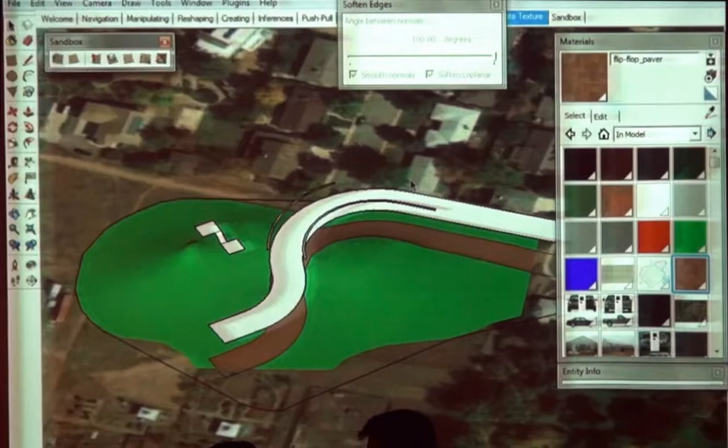So that's how you can cut different surfaces into a terrain. The method I generally like to follow when I start thinking about terrain is you have to work in 2 different places. You work flat—you have to think about, just in 2D space, what elements you want and how you want those to come down and affect that terrain, because it's extremely hard to draw right on top of the terrain.

You can do it—I mean, it's just a collection of triangles, you can actually draw on it, but it's cumbersome to say the very least. Can you do it the other way around, where you build everything, create your planes and shapes, and then you have the contours, and it kind of drapes it all at once?

Let's say I've designed this plaza—I've thought about it, I've got my contours working on it. It's this 2-tiered plaza, there's going to be some stairs in here, and I need this to not just be draped onto here, because this is insane—this is like a 2-to-1 slope here. That's totally unreasonable, it's certainly not ADA.

What I need to do is get this arrangement - I want this flat chunk, this slope where my stairs are going to be, and this other flat piece, but I want them to be, I don't want to use the word seamless because this is a pretty coarse way to do it, but it's a great start. I want this to be cut and sculpted. I want SketchUp to help me grade this shape into the land.

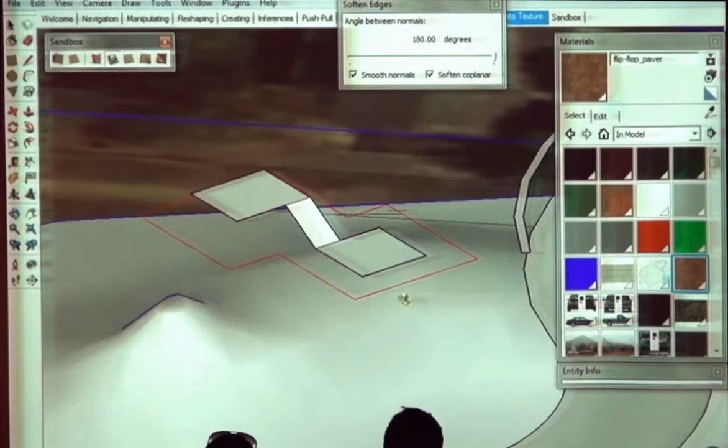It'll make sense here in a second. So it's at 1, which is a pretty small amount. I'm going to type in, how about 10? 10's too big. 8, we'll try 8. Okay, so I just typed 8, hit enter, and now I'm going to click on my terrain. Stamp will make things crash twice as often as drape.

So what it's doing, it lets you kind of move this around. As a rule of thumb, I always like to just move this way high so it's hanging out by itself as a very separate entity, because if it's tall like that, it's really easy for me to go back in, select that stuff, and move it around. This way I can actually use the move tool and snap to things - you can't snap with the stamp tool. So as a rule of thumb, I like to leave the stuff floating up in the sky so it's easy to select, and then move it in really specifically to where I want it to go.

And there's always little tidbits like this. I wanted this ramp here, so some of this stuff here I need to delete, and I need to either draw in these lines - there's only a couple here, so maybe I can just re-triangulate it. That just took one. Erase that guy, just takes another one. In some places where it's more complicated, like here, there's a few lines. If you get a whole bunch of that stuff, think about using the From Contours tool as a stitcher, as a little seamstress.

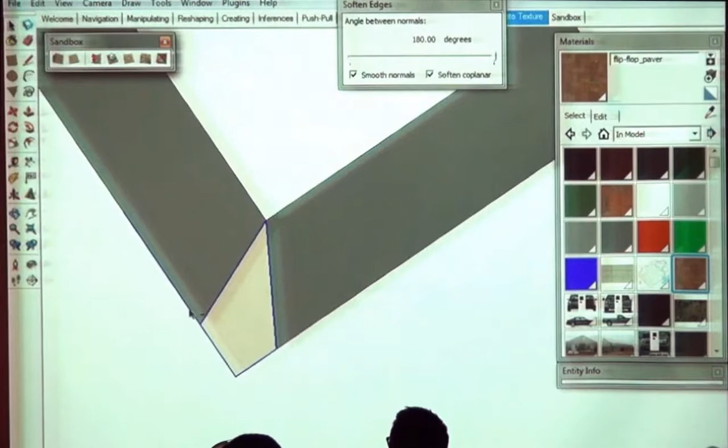If I select just the outline of the gaping hole in my terrain, I can choose From Contours, and it will fill that in. Now it's a group, so I just have to go explode, and I got it stitched in there. I can still see that we've flattened out one of the parts, but that saved me at least a couple minutes. If I was missing a whole side of this, that's definitely how I'd go about doing it.

So then I can select the top of this thing, use my move tool, be really specific, and get it. I missed something, we'll have to clean that up. Get it really specific to where I want. Erase some of this insanity, see what needs to be. So it's hard - this is not a one tool to rule them all kind of thing. This is definitely a stepped process.

We're going to be trying to fix it. Let me just use the... oops. Okay, that one needs even a little more love. Explode. But so that's that concept about how to merge in something really specific, proposed grading, for example, into an existing location. And I use this all of the time for even large projects and save regularly. It looks like I slid it over to the side - that's part of the problem.

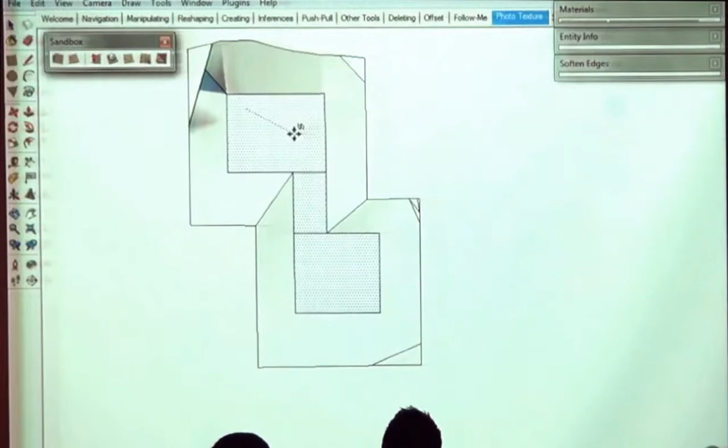So those are really the two tools that you use, and you just have to use them iteratively to accomplish something. Now, clearly, either I need to lay this earth back farther so that it's not so steep, or I need to put in something like a retaining wall. Retaining walls get tough. One of the methods that I would do...

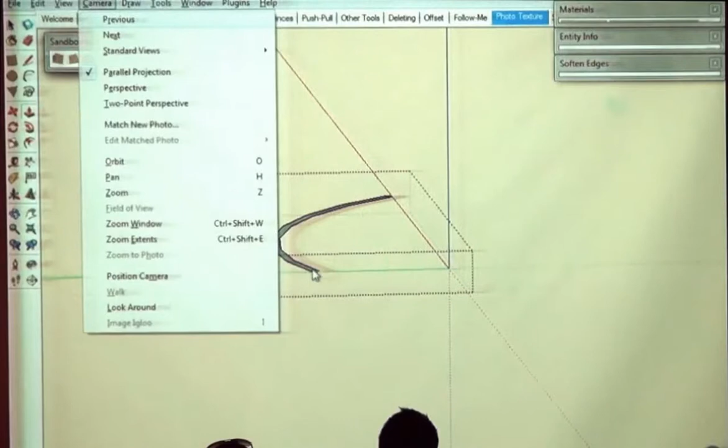So let's pretend that I am stamping this road in - I'm actually going to put a flat road into this fairly undulating terrain. The first goal, I think, is to cut in my retaining walls and delete them. These are just going to be some holes that I'm cutting into the ground. And then I'm going to use my stamp tool, something small like 1 foot, something less than the width of my retaining wall generally. Watch it crash. And we'll put this, I don't know, somewhere, maybe like there. And then I still have these puppies - I can make the walls. Oops, I have no idea.

But clearly they need to not all be the uniform height. That's how you can start to more specifically carve walls into a stamped condition, I guess. Was that just crazy?

I meant, did you guys follow that? Not like, am I amazing? I'm not looking for kudos.

Those are the concepts, and there are just so many. I struggled to think of something real crisp and simple. This is as simple as I could make it, and there are a thousand variations on all of that. If there's something specific you'd like me to demo that's relevant to this project, let me know.

Does SketchUp still have the feature where you can have a background image, like a perspective feature, that you know you're going to use to render contextually? Yeah, there's something called Match Photo, and they do have it, and it is useful.

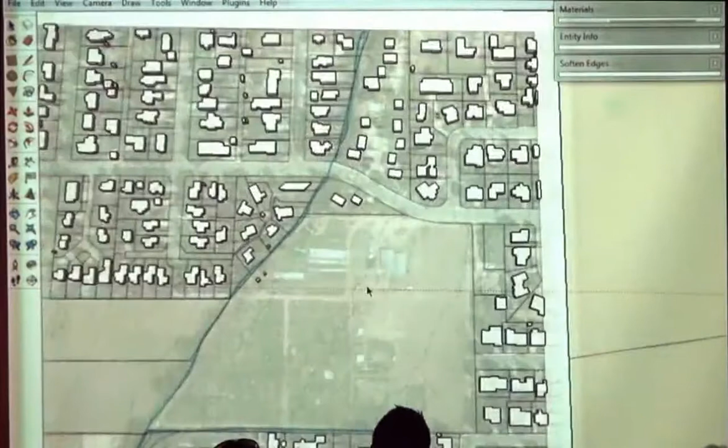We'll scale it. We're going to bring in, because this is a little grainy, an actual air photo to be our base, and then this is just going to be something referenced that sits on top of it and maybe gets hidden at the end of the day. But here's the process to bring in resources from Google Maps: underneath View, Toolbars, you should find Google, should be this small little palette.

This is super easy. Add more imagery, the very first one on the left. If you're on the internet, you should get this - I think it's just because it was where I searched last. So you're going to be zoomed out way out here. You're going to have to type in Boulder, maybe, and then navigate yourself up here. If you don't know where the site is, it's sort of halfway up towards North Broadway, and there's generally the site. So there's a couple of tidbits here.

This little add imagery utility remembers the very first tile, every time you come back to it. It only brings things in at screen resolution. And it brings in this little Google thing and some of this terms of use stuff.

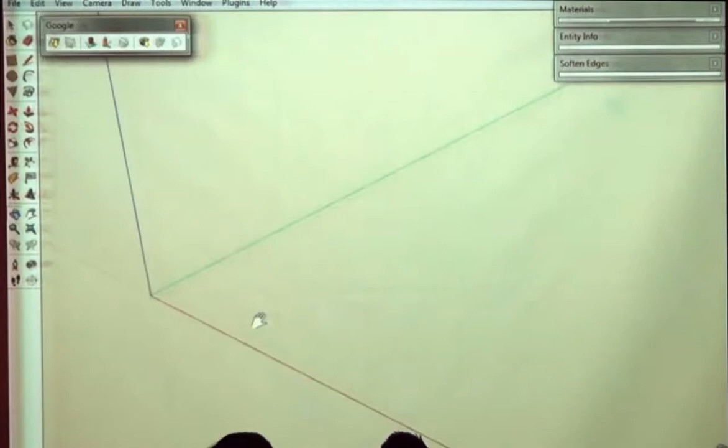Mine's gonna look a little different than yours probably. So let's do that again. Same. How come you keep going there? I don't want to go there.

Okay, so let's try this again. We'll hope that this doesn't do it again. Is that too close? Maybe like that. Okay, select region.

Okay, that should have worked. So now the next time I go back to it - it was because I had used that model and brought in imagery before to test this out and messed it up. If you do this from a blank one, it'll work. So you click on it again - it goes to the exact same location, my very first tile. Three clicks: 1, 2, 3. Select a region and then choose the whole thing again.

What this does is gives you just a little bit of overlap between the tiles. And because these are referenced relative to one another, they fit really well. There'll be little seams, and if you're anal retentive like me, you can ungroup these things and clean them up later. But getting them in here is the first real goal.

So do that again - 1, 2, 3, 1, 2, 3. This is insane, and you'd be astonished at how large of projects - because we don't have GIS data for - I've done this for. Just astonished. And the same thing down: 1, 2, 3.

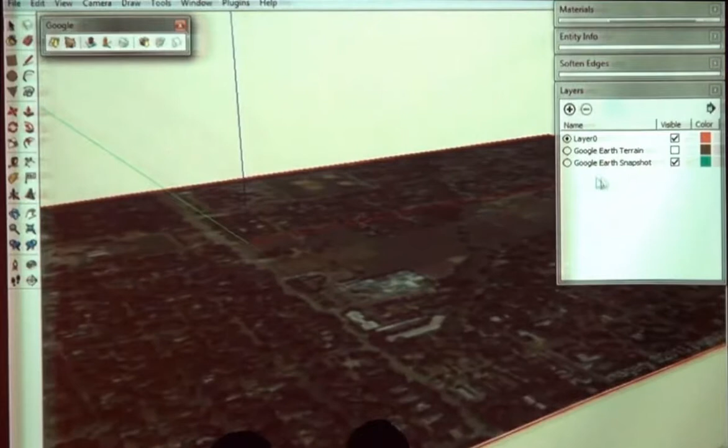If this was my project, I would probably ignore the fact that there's any slope across it because it's so minor from a visualization perspective. My goal would be to delete the terrain part. I don't need that. So I'm going to turn on the terrain one.

I'm going to select this group, and I'm going to right-click and go unlock. Whenever something is outlined in red like this, by default, it's because it's locked. So if you right-click on it, you can go unlock and then delete. Same with these guys—select all of those, unlock, delete.

Then I can toggle back, and if I want to really delete these layers, you can select them and press this little minus, and you get this wonderful dialog box that gives you some options. So I'm trying to delete these 2 layers. I can move the contents to the default layer, move them to the current layer—which is what this radio button indicates, they're both the same at current—or delete the contents altogether. I'm just going to move the contents to the default layer, layer 0.

We didn't talk about layers, so maybe I should take this opportunity. Let's grab a tree maybe.

Window, components. I'm just going to type in tree to the 3D warehouse. Hey, here's a great learning lesson—there's going to be a ton of 3D trees. Some of them will be good, and other ones will just destroy your scene. This one, for example, is a bad tree. I don't even know how many polygons there are in this thing. The ones that have individual leaves like this are bad. Your computer is going to be able to handle a dozen, maybe, if it's fast. Don't use this type of tree.

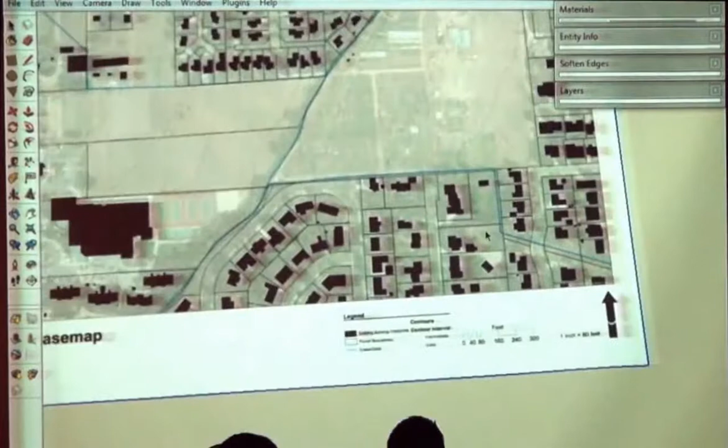A couple of things - this has a graphic scale on it, so I'm going to assume that that's right. Double click on this thing. We can do some magic. So we could measure this.

Okay, so currently the distance is like 202 feet in my model, and it needs to become 320. I could get out my calculator and figure out what the scale percentage is, and do that - but that sucks. Math sucks.

So you can actually use your tape measure tool to do that scaling for you. The concept is that you measure a distance and then tell SketchUp what you actually want that distance to become. The one caveat is that because I have this air photo in here, I don't want to screw up the scale of this air photo.

I only want to affect this one image. So to do that, you have to make sure it's a group, and you have to use the tape measure inside the group so its changes are limited to just this group.

So tape measure, click there, and now I'm going to type in 320 feet, enter. This box will come up every time: do you want to resize the active group or component? If I did this outside the group, it would ask about resizing the whole model or entire something, and you'd be changing things that were previously correct. So you want to make sure it says active group or component.

Hit yes. And now if I draw another line, I can just double check. Now this one - you guys can't see it because it's at the very bottom of my screen - but it says 320. So now, let's see, what are some real visible elements?

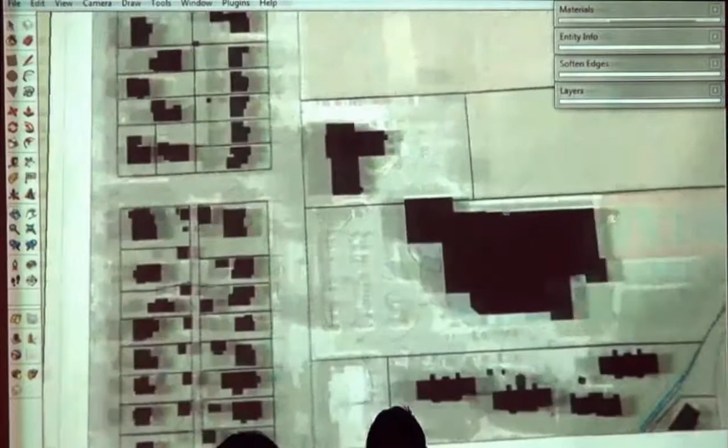So the tennis courts are probably a good one. Maybe even this little crossbar on it - that's one good thing. We can't quite see it here because I brought this in too low, but it's about there-ish. Let's get rid of these trees.

And then somewhere kind of on the other side, the greenhouses - let's just do the greenhouse. So here's that corner of the greenhouse. Okay, so that distance from the tennis court crossbar to the opposite corner of the greenhouse is just shy of 1,300 feet. So hopefully that's what this is.

So if we go from here, is it from the opposite corner? Yeah. So if we go from here to here - it's actually not. Is the scale off on this by chance?

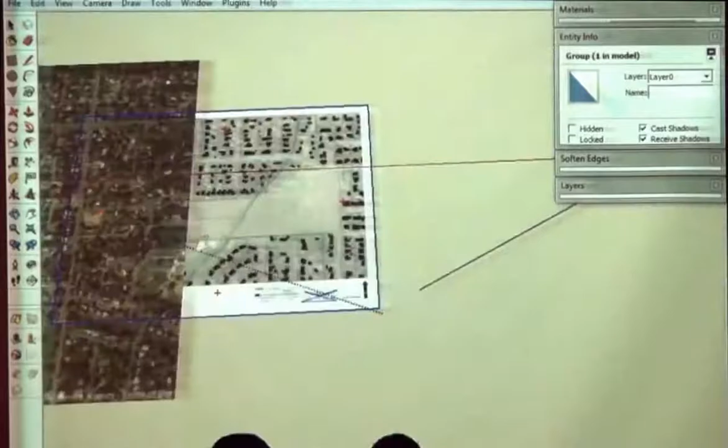Yes, we want to resize it. And now we'll come in here and grab you, and stick it right there. And now it makes you go a little insane, but if you look at some of the spots, you can see as it flickers that it's really, really close.

It's certainly close enough for government work. It's really funny how many government people actually say that. It's terrifying, terrifying.

So that's kind of the process for bringing something in and getting it in place and getting it to scale, most importantly. So now there were those buildings. Here's a great example. So I had back over in this Google Earth one that I made that I thought we were going to be able to use.

These buildings were already popped up. We can copy. So this is how, if you have your own personal library of stuff, another model, or if you're breaking this model up and doing a group thing, you can have people work on different parts of the model in different places at different times. As long as they share the same common base, you can copy and paste things into place real easily after the fact. So I'm going to copy this.

This isn't going to come into place because I've changed everything. But if you just go up here, edit, copy, paste, just Control C, Control V, like literally everything else, and then go paste. There is paste in place, but it's not relevant for this. And we'll stick it in here.

So it looks like we have to scale that too. So, maybe to this guy. 1577, go into this group. 1577 feet, enter. Yes.

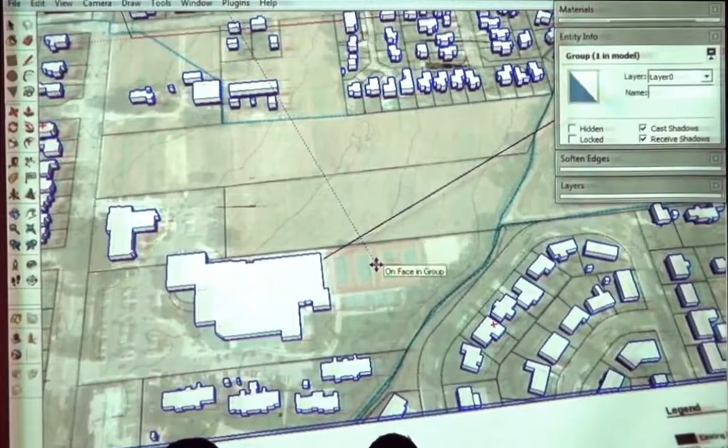Pretty close. So that's how you can kind of put that base together.

I then would make some scene tabs that maybe show and hide some different geometry. I like to have kind of a working one. So there are a couple things going on here. We need to unlock all this air photo stuff. Unlock so that we can hide it. We can't hide it otherwise.

So the scene tabs we haven't talked about. Well, how much time do we have? No time? Is class really over at 11? Or is that when I get kicked out of here? That's when I think, that's when I need to take my section.

Okay, last thing I was going to talk about then is styles and scene tabs. So scene tabs, the most abbreviated version I can do this in the world. Scenes are those little things that we were using before. Before, we just had it memorize the camera location. But it also can remember things like hidden geometry and what layers are showing. So if I wanted to have one where it's just air photo, I can hide this.